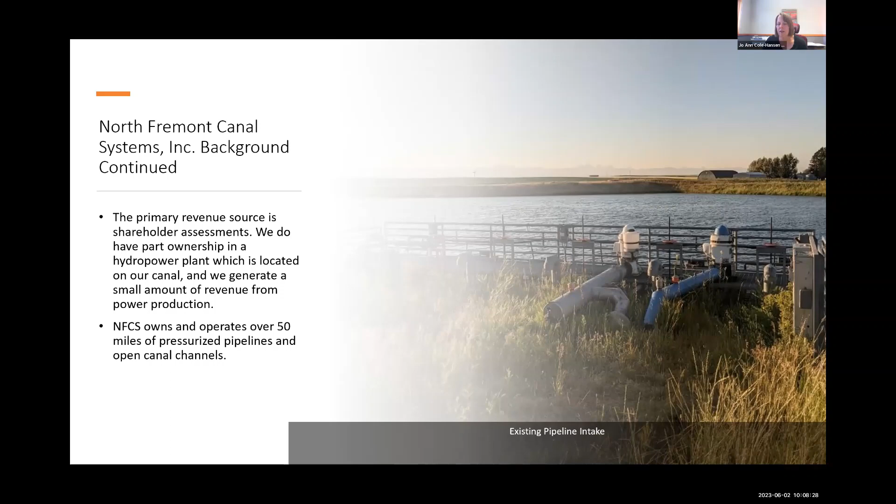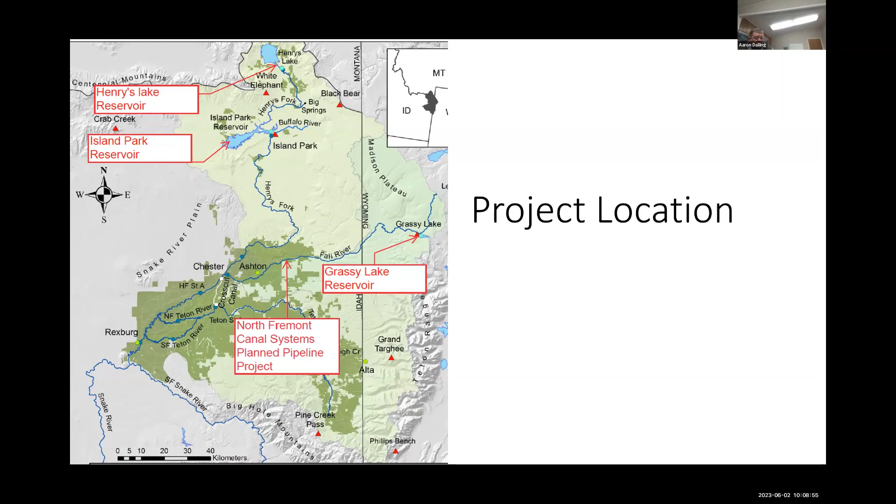Got some more project background. We started with phase 1 in 2004. Like we mentioned earlier, we're 4 out of 5 phases complete and in use. We are a pressurized system. We have 377 feet of elevation fall from the head gate to the end, so the entire project was pressurized via gravity. Phase 5 is essentially shovel ready. We've got over 90% of the engineering done.

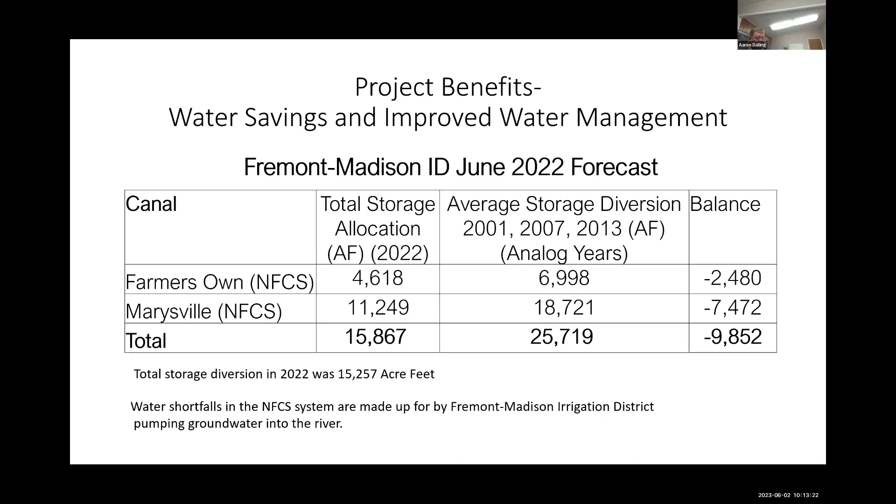2018 was the completion of our last phase, phase 4. And from 2018 to 2022, our average diversion was 28,564 acre feet. Annual savings of 6,289 acre feet. Percentage-wise, that's 18% in water savings. Now, there's some things too that we'll talk about in a moment as well, but this is water that's staying in the system. So this is water that is staying in the aquifer.

Some of our first diversions on our canal system are pasture ground that's on the very western edge of our service area. And in the open canal system, a lot of times when they would call for water, we would have to put 2 or 3 times the amount of water in the head gate to get that water to them on the end of the system. Since we are a sealed system, after the system is filled, essentially you can put in just what the people need at the tail end.

So that is water that is staying in the river at a critical time, like right now, to fill the downstream reservoirs, to make sure that we have 100% allocation, or as close to it as we can get. So something to keep in mind there.

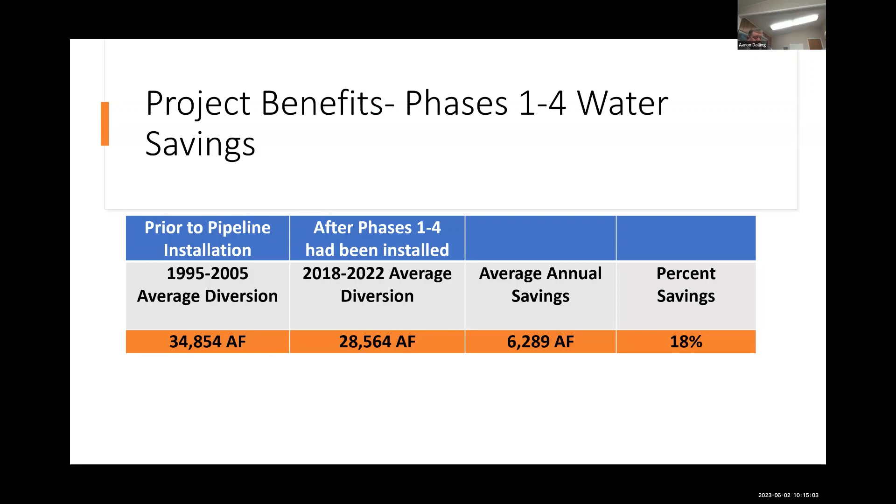Something we've done above the ESPA in our areas, we do have some planned recharge sites. We're going to look at that. We'll discuss that more in a minute. Obviously, if you put things in that pipe, you will lose your incidental recharge. But now we can do managed recharge.

And we've also done some things with the school district. We've been able to hook the high school and the elementary school up to this system, which has greatly taken the pressure off the city system, and since the city also has to run that through a nitrate treating plant, that has helped with that as well. And we hope to work with the city in the future off of this phase to be able to hook in things such as the city parks and possibly the Ashton Living Center nursing home. So something to keep in mind there.

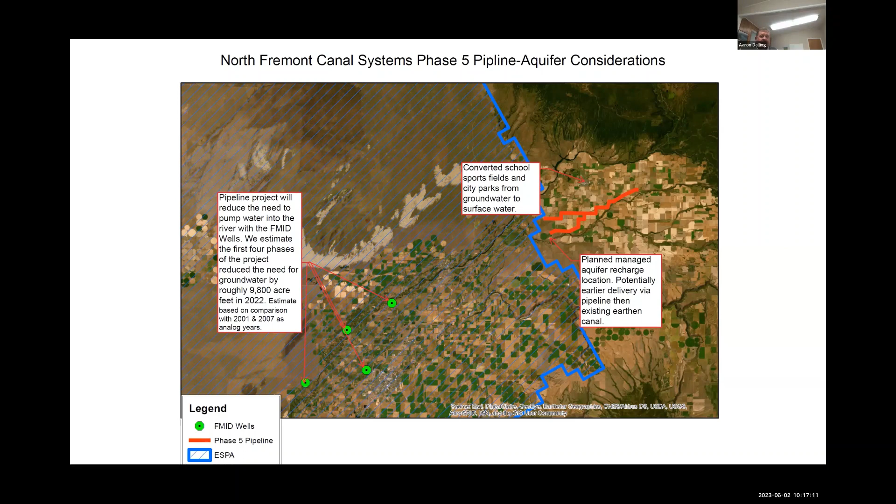So just as we mentioned earlier, we have a connection to a managed recharge site. Actually, members from the IDWR Aquifer Stabilization Committee came and looked at our recharge sites last summer, the places that we intend to do the managed recharge. We do reduce the groundwater diversions from Fremont Madison wells, which is water that stays directly in the ESPA aquifer, and our conversion from groundwater to surface water for school districts. And we're hoping to continue working with the city on that in the city parks, and like we mentioned, possibly the Ashton Nursing Home, who is one of the biggest water consumers in the city of Ashton.

The pipeline will provide gravity pressure. So all of these pumps will be fully pressurized. So there will be no pumps at all. Some of the other projects were close enough to the head of our canal that we did have to have some booster pumps, but this phase will be fully pressurized. This phase alone is estimated to reduce power annually by 1,761,300 kilowatt hours saved. And every pump on phase 5 will be removed. Once again, this will be fully pressurized.

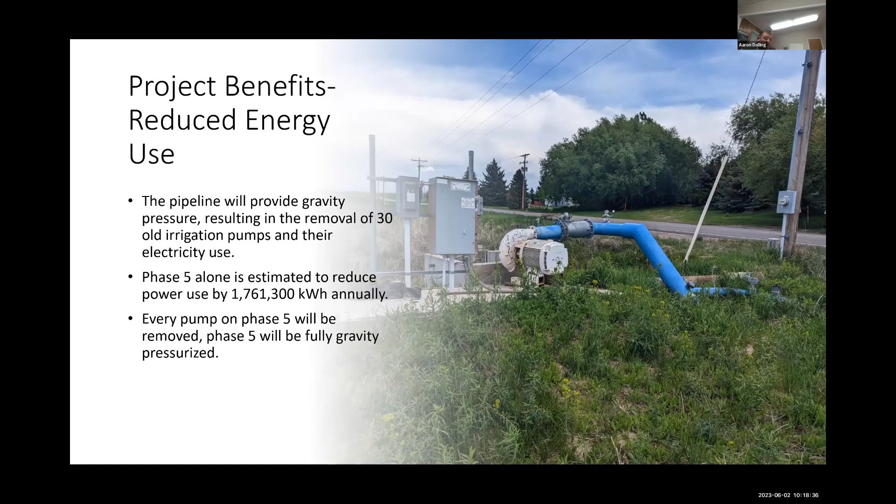As far as aging infrastructure, we plan on removing 31 old check structures, give or take. A lot of them are 30 to 40 years old. I know some of them that are older than that. Removal of dozens of old head gates, turnouts, and we all know what those are like and how much they leak, things of that nature.

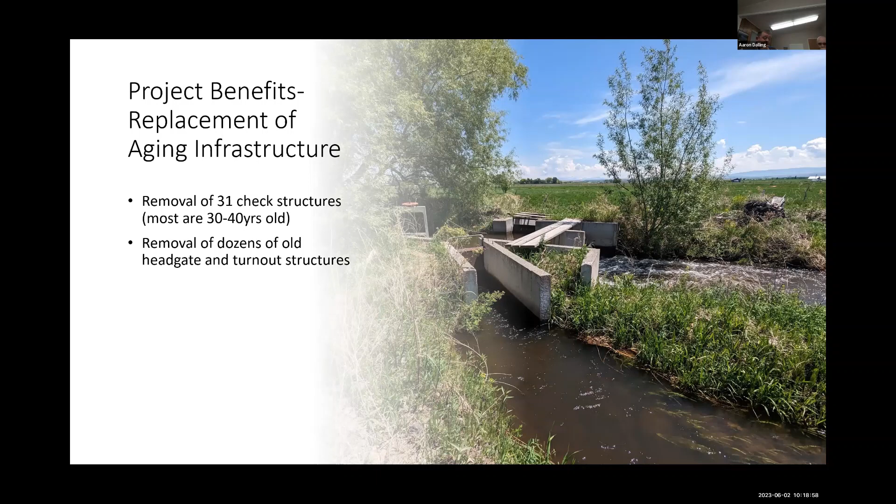We wanted just to touch briefly on some of the project benefits as far as wildlife is concerned. You know, the Henry's Fork is a world famous fly fishing destination, contributing 50 million to our local economy annually, not including the additional 14 million in property tax revenue from second home ownership in Island Park. So reduced water delivery from Island Park Reservoir during the irrigation season will increase winter flows in the Henry's Fork. These winter flows are the single most important factor for trout survival on the Henry's Fork.

We will reduce diversions from the Fall River. This increases the river flow. And we also included what was emailed yesterday. We do have a letter of support from the Henry's Fork Foundation in this. They're one of the main bodies that checks the river, kind of governs the river on water quality issues, and they are in full support of our project.

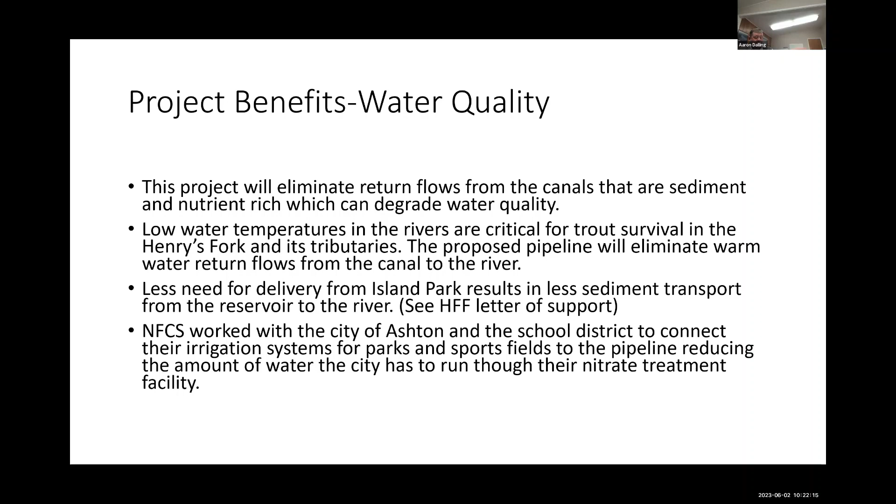Some of the regional benefits to our project: North Fremont Canal System reduced storage water diversion will increase carryover and subsequent allocations from Fremont Madison Irrigation District in years Island Park and Grassy Lake storage rights do not fill. This will benefit 44 canal companies and over 2,200 individual storage water holders. Additional carryover in the upper Snake River system may increase the likelihood of recharge water rights coming into priority earlier the following spring. And the project will reduce our required diversion during the spring when the reservoirs are filling, which is a benefit to every water user.

There are several pastures at the end of our system, like we mentioned earlier, that require water early in the year. The earthen canals require significant push water. For the pipeline, we could divert only what is needed for their irrigation system. And these pastures are a good example this year. They are currently watering, and because of some of the rains we've had the last couple of weeks, I doubt there'll be any crops that need water for probably 2 to maybe 3 weeks. So there's that period of time where that water will stay in the river and help fill the system.

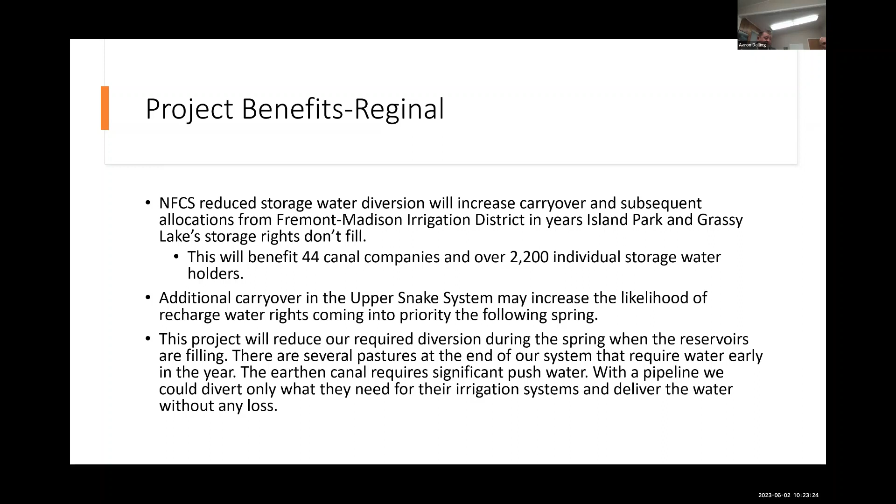Some of the local benefits of our project: something we've done in the past on the previous phases, and we plan on doing on this one, is we install hookups for the fire department. So if there is a fire in rural areas, they do not have to go all the way back to town to reload their trucks. They can hook right up to the pipeline and fill the trucks, saving a lot of time. I know there's been several fires in the past where this has been a huge benefit.

We've closed in a lot of canals, some by the school, which was always a hazard for us. We'll close some that run close to and underneath the highway, especially if you've ever been in southeastern Idaho from Memorial Day to Labor Day. There's a lot of traffic there. There's some danger hazards. We've had accidents where cars have been in the canal, things of this nature. So from a safety standpoint, this will be a good benefit.

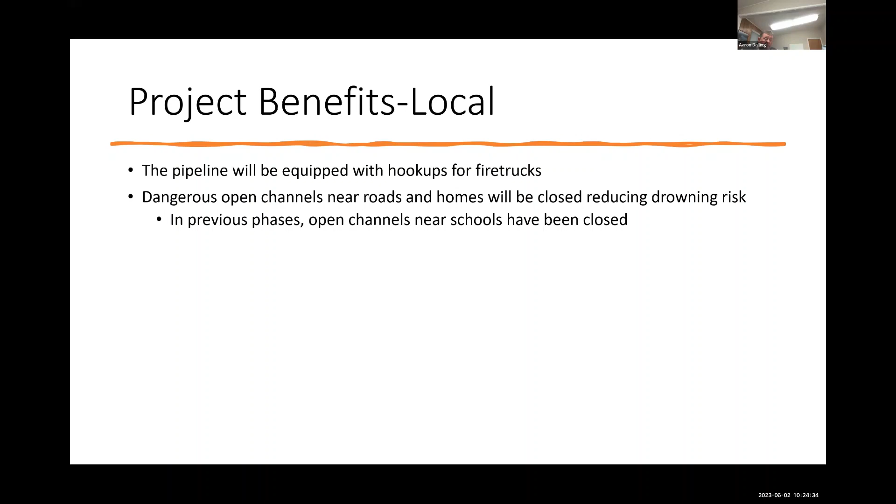We do have broad stakeholder support. So this is included as an alternative to conserve water in the Henry's Fork Drought Management Plan. Signers on the plan include the Fremont Madison Irrigation District, North Fork Reservoir Company, Henry's Fork Foundation, Trout Unlimited, the Nature Conservancy, and the Bureau of Reclamation. As mentioned earlier, we do have support from the City of Ashton, a letter of support from the Henry's Fork Foundation, and we also received verbal support from Fish and Game, but they have not been able to supply us with a letter yet.

And something to bring up as well, this project, and it has been for years, is supported by the Idaho Water Users Association by resolution. So it's resolution 2023-7. I won't take time to read the whole thing to you. I believe you have it in front of you. But I think the takeaway is that last sentence, that therefore be it resolved that the Idaho Water Users Association supports the North Fremont Canal System Incorporated in its efforts to fund, plan, and build the North Fremont Gravity Pressure Irrigation Project. So we are supported by the entire Idaho Water Users Association.

And if you have any questions on the funding here, there's one reason we asked Jake Owens to be here from the NRCS, to maybe talk just a little bit about the time constraints we do have on using the NRCS funding. So the source of our funding. So the NRCS is $7,157,988. And I'll just turn this a couple minutes over to Jake to maybe explain to you the time constraints we have there.

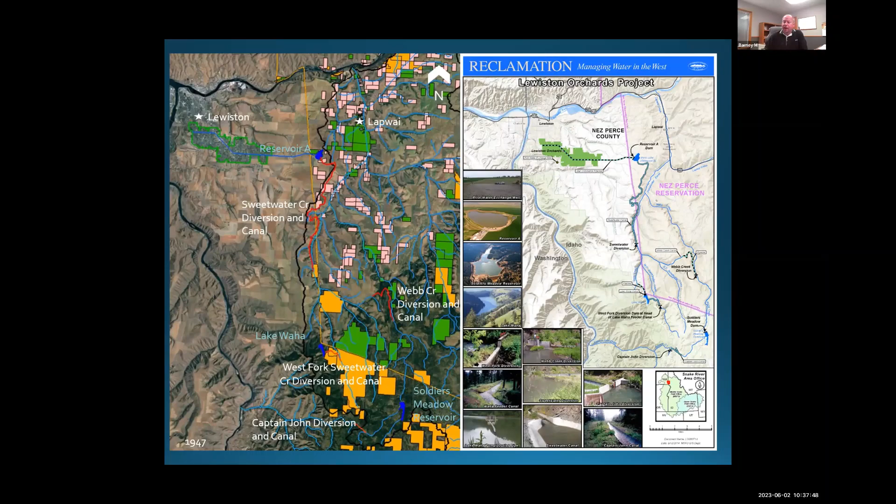And the busy map to the left of the one I was using for orientation shows you all the tribal trusts and fee title allotments within the reservation that are impacted. So again, down here, if you can follow the cursor, Soldiers Meadow Reservoir, Lake Waha, and Reservoir A, and then all of the pink, green, and yellow lots are specific allotments that are being affected through this project. So there are some complications with waters that were intended for tribal use that have been impacted by the effects of the LOID project. So how did we get to where we're at now?

The Lewiston Orchards Irrigation District actually formed as a private interest back in 1906, which is our first water right. The system was expanded from Sweetwater Diversion and Reservoir A to include diversion into, storage of, and pumping out of Lake Waha in 1915. And then the irrigation district was formed under state law in 1922, and they built Soldiers Meadow Dam on the Webb Creek watershed, and then we release water out of there, divert it out of that watershed, place it into the Sweetwater watershed, and it brings it all into our system.

Once it leaves Reservoir A, our lowest reservoir in the system, it is fully pressurized from that point. Not only does it provide ag water, but it also does provide fire flows and fire protection and suppression within the Lewiston Orchards Irrigation District service area. So one of the issues that we've had is we have a low elevation system. Our highest point is no higher than 5,000 feet. So we tend to not have heavy snows over the course of the winter, and it can be a pretty flashy system. And so the system has never done very well in being able to deliver the amount of water that we have been promised.

And in 1947, the Bureau of Reclamation took over ownership of the system, and the LOID continues to operate it in management for them. And our contracted amount is 2.2 acre feet per acre, and that amount has never been fully delivered upon. So the patrons of the district in the 1970s tried to resolve this issue on their own by building a pumping station out of the Clearwater River. Although it had favorable support, it didn't have enough to pass the bond threshold in the state of Idaho, and it failed. So the patrons of the district tried to resolve this issue on their own, and were unable to do so.

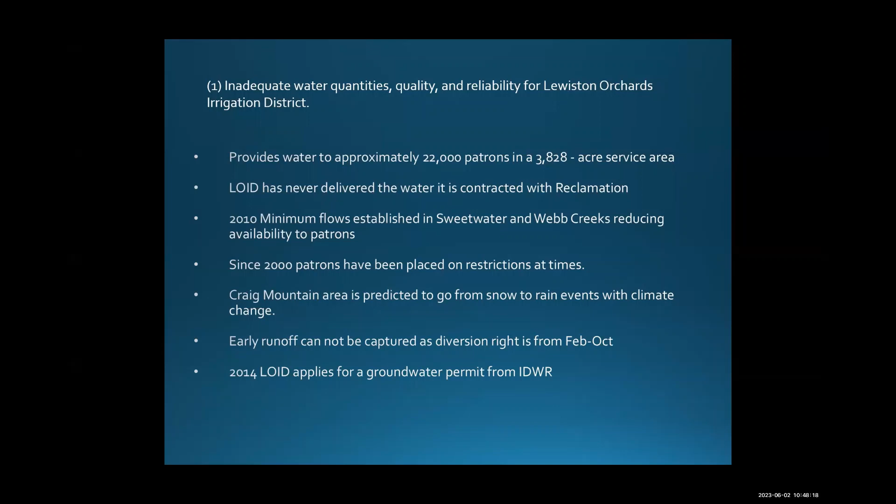And then the other difficulty is that we're already in a critical groundwater management area. Us continuing to poke big production wells into there is only going to make it, on a regional basis, more difficult for people to use the water and to manage the water that they have there. And quite frankly, the regional aquifer is divided by state line. We have Washington on the west side and Idaho on the east. At some point in time, if we continue to impact the regional aquifer the way that we have so far, and we're trying to avoid more discussions between the state of Washington and the state of Idaho, they may have to look at some form of conjunctive management as we continue to impact that system as it exists there.

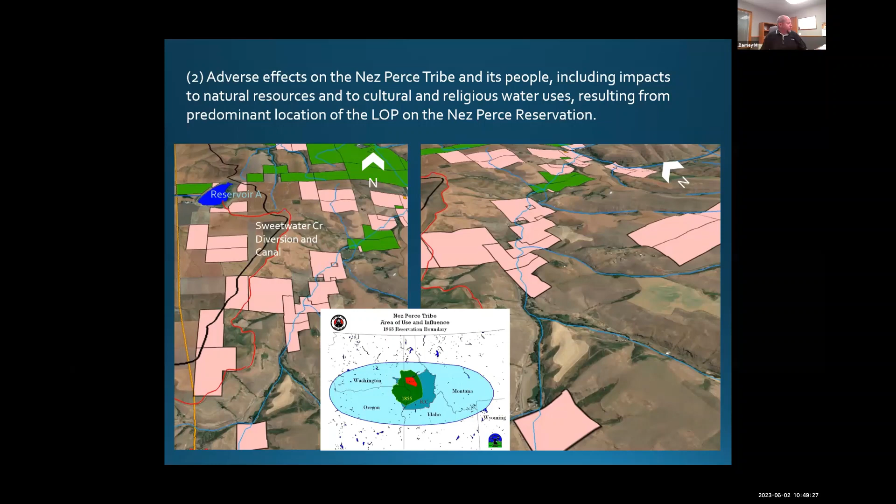This slide goes back to number 2 of our points. On the slides, the Webb Creek watershed is on the right, and the Sweetwater Creek watershed is on the left. All of the pink and green areas are tribal, tribal fee, or tribal trust lands that are being directly affected by the impacts that LOID has on water within their reservation. And then going back to the fish issue, when we diverted our full allotment out of the streams prior to being on these biological opinions, we would typically dry up streams downstream of our diversions, and it's really tough for fish to be successful if there's no water in the streams.

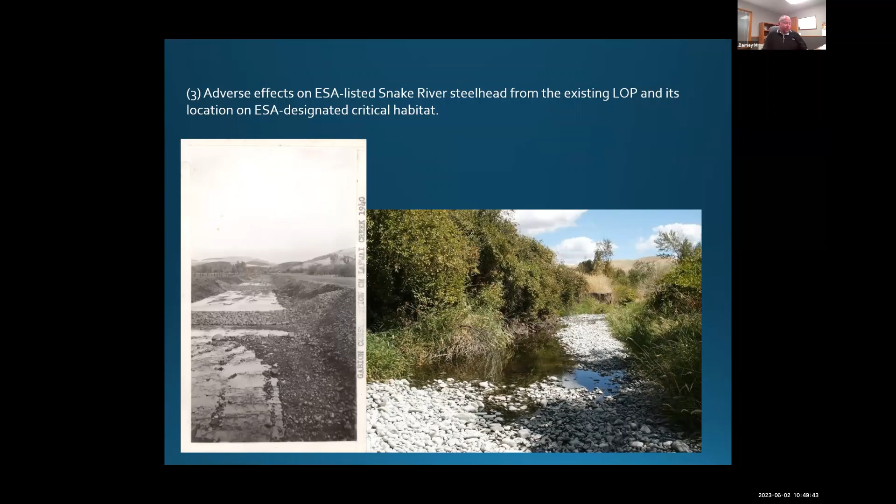So key points in moving forward: this really truly is a collaborative approach. The Bureau of Reclamation, the Bureau of Indian Affairs, the Nez Perce Tribe, LOID, the City of Lewiston, Nez Perce County, and the Chamber of Commerce continue to work together. We're looking for a solution to our issue. Although we've made it somewhat down the road of the groundwater solution, we think that there are complications and mitigations that would have to be done to continue using that as a solution. And we think that the total cost of the back end of the groundwater solution will exceed the costs of a pumping station out of the Clearwater River.

We've asked all of our partners if anybody had a big red flag with us considering the option of switching from the groundwater solution to a pumping station out of the Clearwater, and they all think that there's some viability in that. None of them had any direct heartburn to do so. And it was one of the alternatives that was considered during the NEPA process that we did back in 2011 through 2014.

Currently, we have the ability to pump 9 CFS out of the groundwater, which we are currently doing at this day. And then we're releasing those additional flows on top of our ESA flows downstream of our diversions for fish. Two other items to take into consideration are going to impact and make the groundwater solution more difficult.

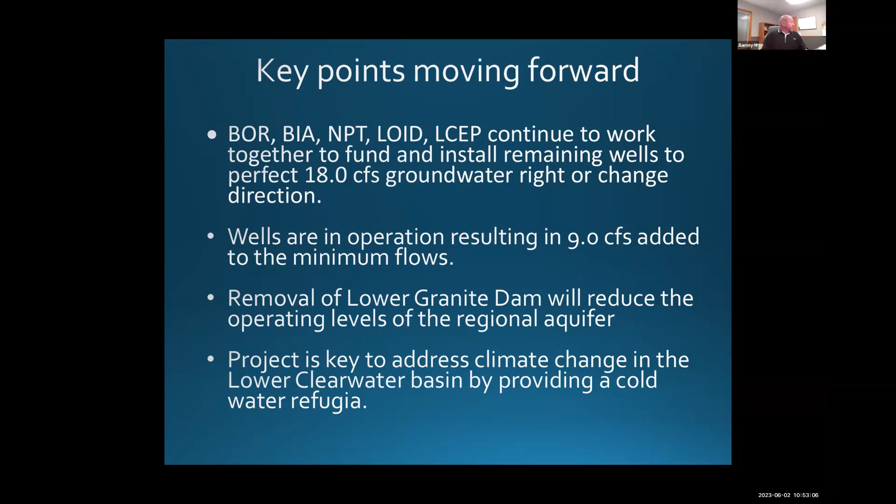So one of the things I want to come back to is the Nez Perce settlement, which is starting to see its sunset. So this issue is not going to go away. It'll probably resurface. The fact is that this exact project of a pumping station out of the Clearwater was the proposed solution back in the initial terms of this Nez Perce settlement. And once that had to be eliminated from a cost and negotiating perspective, the Nez Perce tribe ensured that it was listed specifically as a line item to be open for discussion and litigation, and the tribe has already litigated on it as soon as the agreement was signed.

We continue to await and will continue to have to operate under biological opinions from National Marine Fisheries, which impacts an already limited system. And we think that we were somewhat of a sacrifice that was necessary to the stakeholders for the state of Idaho to ensure more certainty with the negotiations and signing of the Nez Perce settlement agreement. And that is why we are asking for help today.

We think a solution from the Clearwater River will be upwards of $60 million. We paid money along with the Nez Perce tribe and along with Trout Unlimited to do a 10% engineering design on this so that we had a more firm number on how much these costs are. We have a path moving forward. We have a path that's been discussed in negotiations with the landowners for this to go. The Nez Perce tribe believes that the NEPA work has been done on this as an alternative as part of our appraisal study process that we went through.

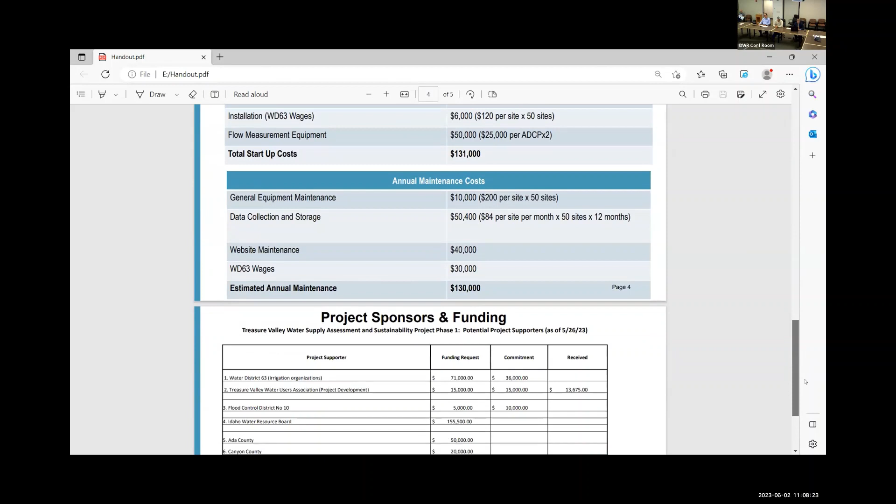Okay, this page summarizes the 3 phases of the project that we'll be talking with you about today. Provides a project cost summary in 2 pages and gives you a list of potential project supporters. We're doing with this project something similar to what Flood Control District 10 did with regard to the 2-dimensional hydraulic model that the Water Resource Board helped provide funding for a few years ago.

And that is, we're reaching out to stakeholders in the Treasure Valley who are affected by the Treasure Valley's water supply that we'll be speaking with you about today for their support. And as you'll see here, thus far, the Water District is committed to provide funding support. The Treasure Valley Water Users Association as well. Flood Control District 10 has committed funding.

We met with Ada County a week and a half or so ago, and the Board of Commissioners has encouraged us to seek up to $50,000 in funding from the county, and we'll be presenting to Canyon County and the others as we go through the course of this year.

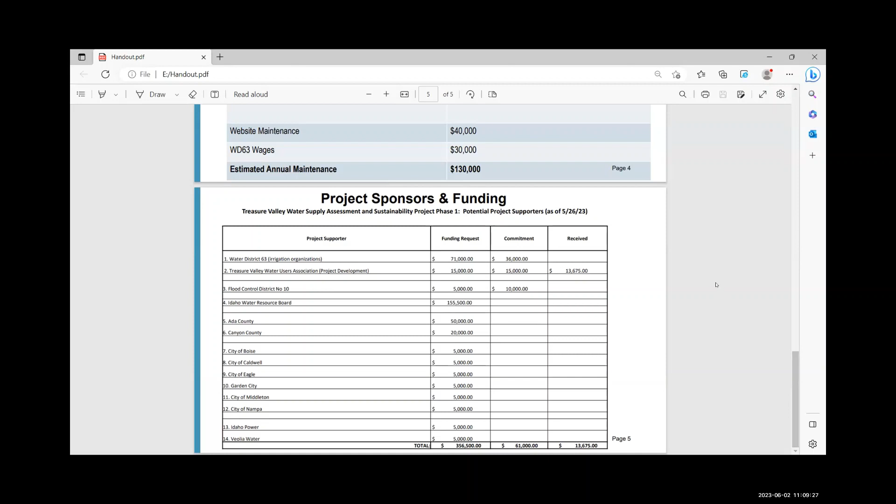Okay, now should I press stop share and bring up the presentation? Okay. Is this what you want to show? The presentation now, actually. Was that not what you just showed? No. Okay. So it's on that same disk. What do you want to see? This top file right there. Got it. Should be able to just... Right here. The back and forth. Should just advance it.

Advance it, okay. So as with the other presenters, Madam Chairman, members of the Finance Committee, we want to thank you for the opportunity to present this project to you and for your consideration to provide funding for it.

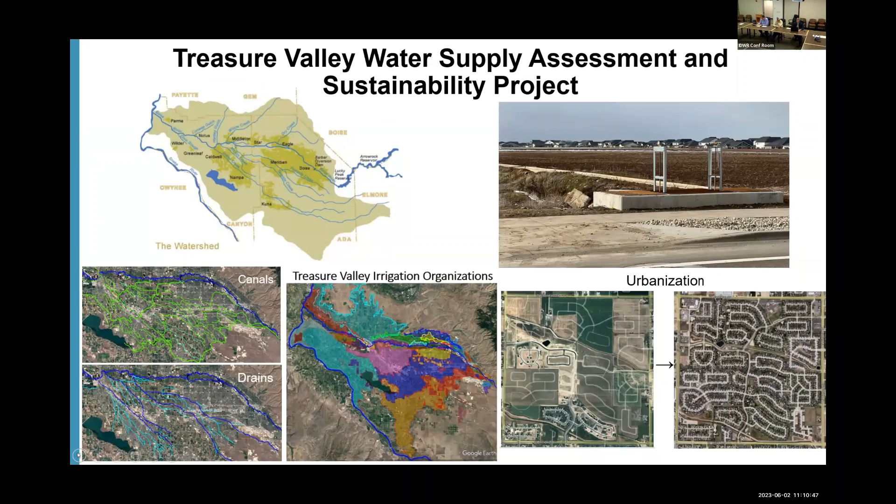Okay, the Treasure Valley watershed is shown in the slide that you can see now. You can see the Boise River beginning at the reservoirs that provide supplemental storage to the river coursing through the major cities of the Treasure Valley.

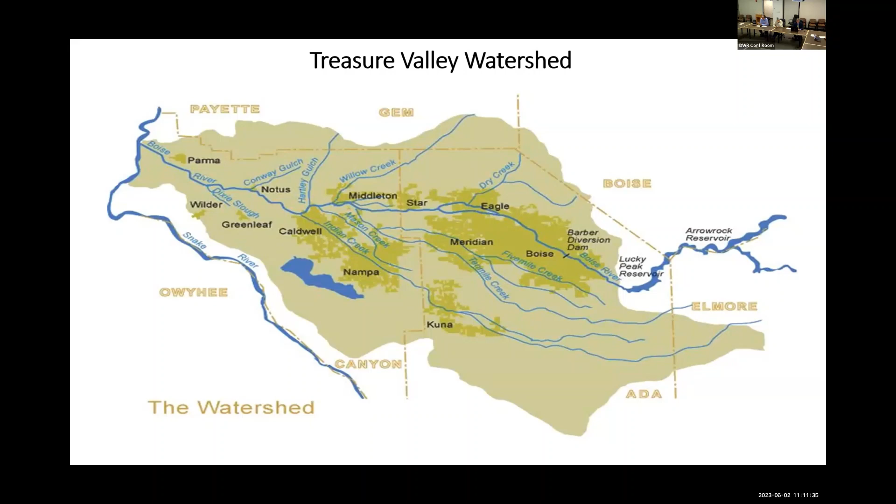And this image shows in particular a number of the major drains that I'm pointing to with the cursor now, most of which join the river below Middleton and provide the primary source of water supply to the Boise River during the irrigation season. So this project, this water supply assessment project, focuses on those drains that I just mentioned, along with many others that are of smaller scale, but yet do provide important water supply to the Boise River.

And why are we focusing on the drains? Well, as I mentioned, they are a primary source of water supply to the Boise River below Middleton. There are numerous water deliveries from the drains that are a major source of irrigation water in the Treasure Valley. And the drains are a bellwether for Treasure Valley water supplies because, as you'll see, they carry water from the shallow aquifer. So they are indicative of the condition of the shallow aquifer.

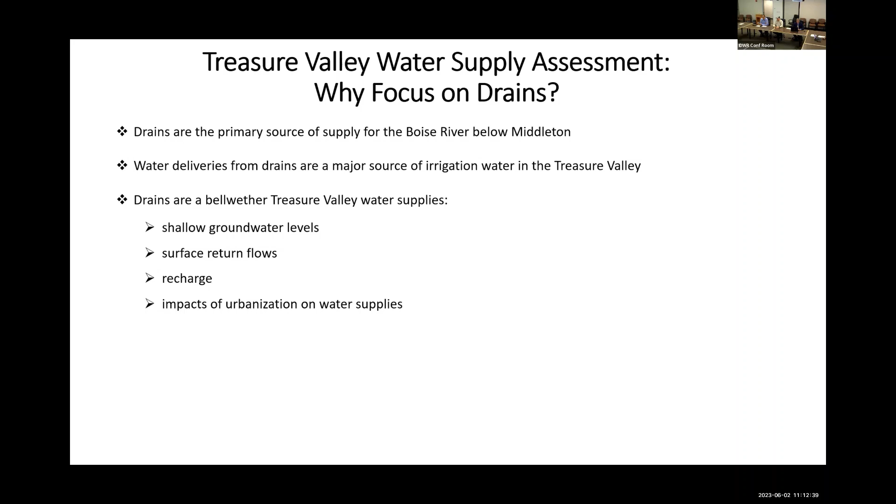They receive surface water return flows. So they are indicative of declining surface water return flows as lands urbanize. The drains are indicative of the extent of recharge, both from flood irrigation and from canal seepage, and impacts to our water supply from urbanization as it continues at its rampant pace over the last few decades.

And so historically, the Treasure Valley outside the Boise River floodplain was a desert. There were no continuously flowing, year-round flowing streams, tributaries that carried water to the Boise River. The major drains were ephemeral at best, and many of the drains that we're aware of today didn't exist at all.

So it was through the period of settlement and irrigation development of the Treasure Valley that the hydrology that we're familiar with today came to exist. And what you're seeing in this image is an outline of all the various places of use of the irrigation districts and canal companies that deliver water to the Treasure Valley. Overlaid on that image now, you can see the intricate water delivery and drainage systems that have evolved over time to deliver water to these lands.

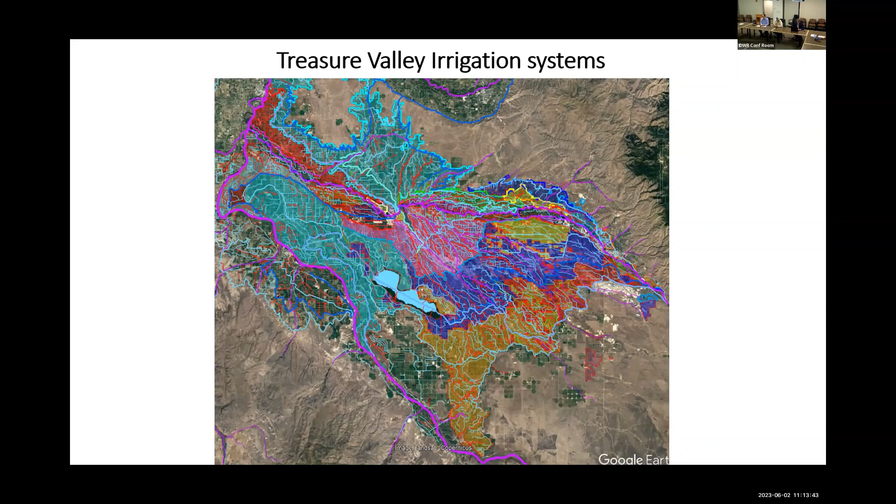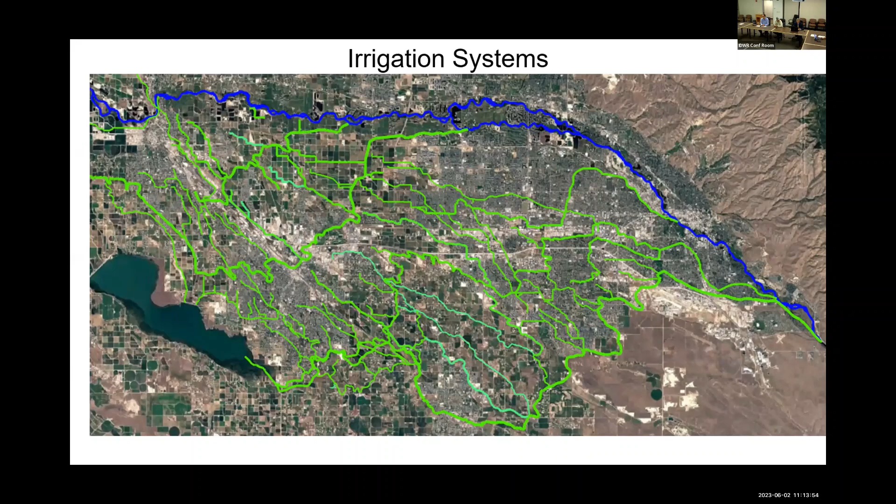This image is indicative of major canal systems diverting water from the Boise River and lateral canal systems that deliver water therefrom. So what transpired over the late 19th century and early 20th century was that seepage from the canal systems you saw and seepage from flood irrigation of the irrigated areas that you saw created the shallow aquifer in the Boise Valley.

And as I indicated before, it really created the flows that we have seen in the drains over years, so much so that by the period 1904 to 1910, areas of the Treasure Valley were waterlogged and unusable, so that local irrigators worked with the Bureau of Reclamation to develop drainage systems to deepen existing drains or to create new drains to drain the lands that had become waterlogged and make them usable again.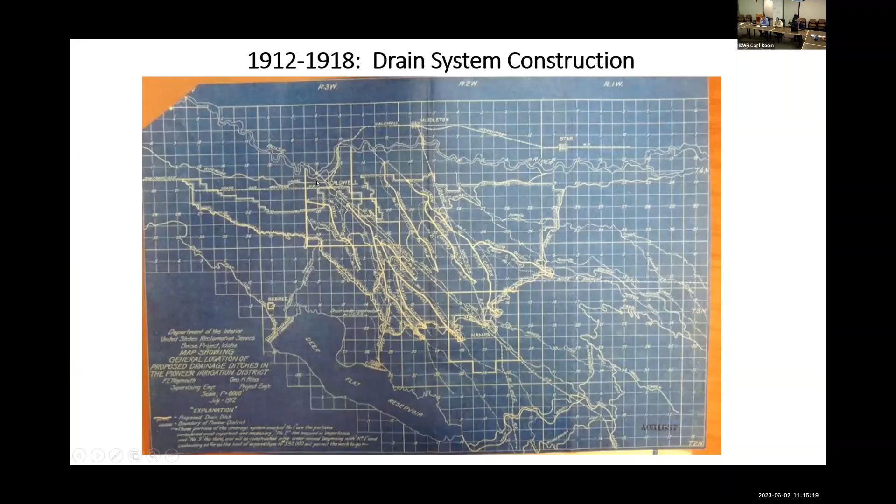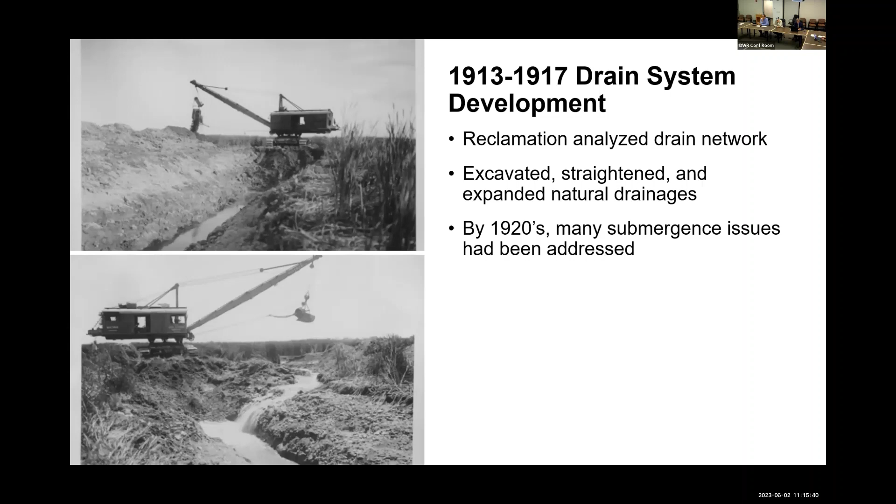Here you can see in blue and red drains that were constructed in 1916 and 1917. These drains were dug, many of them to a depth of 10 to 12 or more feet to intercept the shallow aquifer that had been created by the successful irrigation of the valley in the late 19th and early 20th century. And as you saw from an image previously, these drains crisscross much of the Boise Valley.

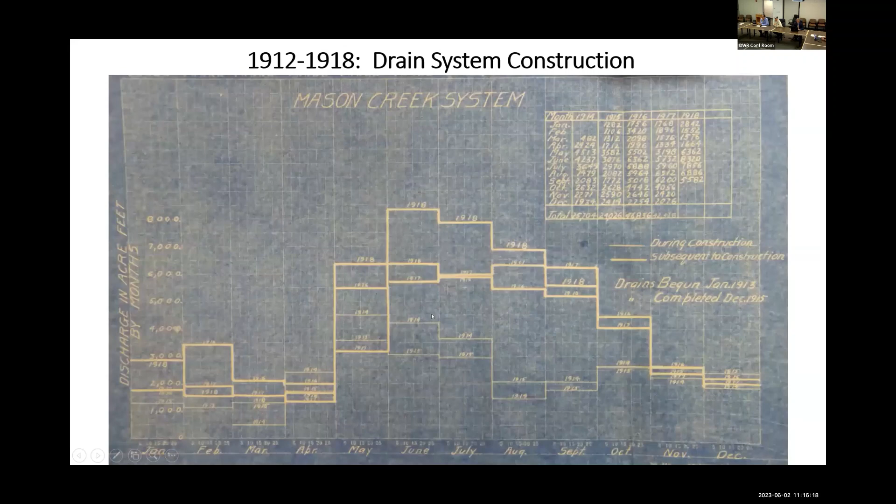And the construction of these drains was so successful, the deepening and widening of them, that flows to the Boise River increased from levels that are indicated in this hydrograph in the area where I'm pointing now, pre-construction, to the flows that you can see in the bolder lines higher up in the figure that I'm pointing to now. 5 Mile Creek is one of those major drains. Similar effect from drainage construction in Mason Creek drain, similar in Indian Creek.

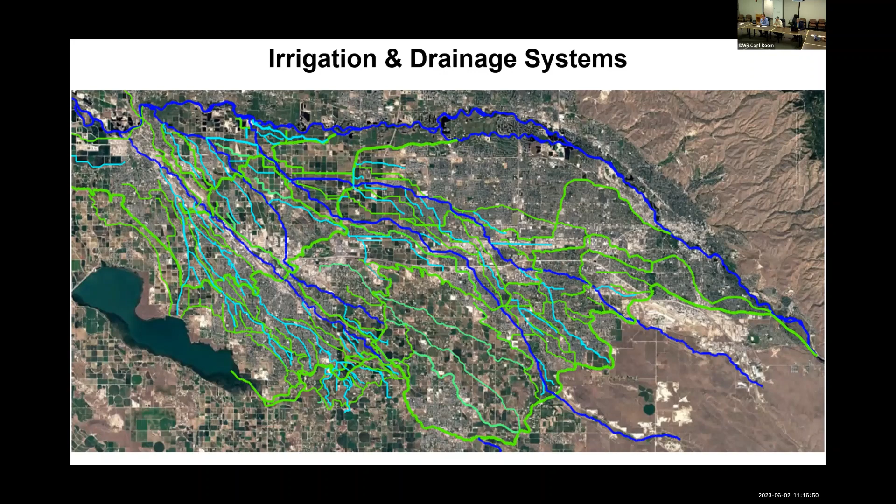And here again is an image showing Indian Creek, Mason Creek, and the 15 Mile drainage system in blue, and sub drains connecting with those drains in lighter blue. And overlaid there in this area south of the river are many of the canals and laterals that deliver water to those areas.

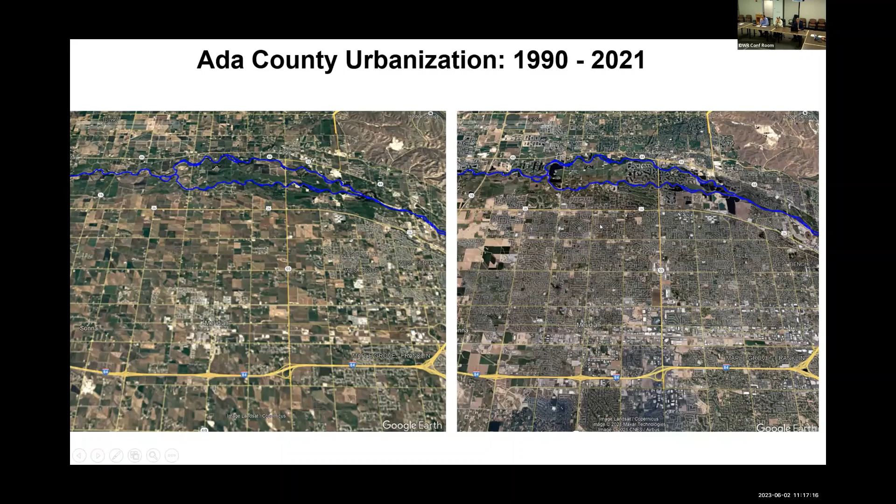So the major factor in our hydrology since certainly the early 90s has been urbanization. And you can see in these images showing the Treasure Valley in 1990 on the left, in Ada County, and Ada County in 2021 on the right, the extent of urban development in the area. Similarly, in Canyon County in the Nampa area, dramatic urbanization over the same period of time. So what are the impacts of urbanization on the hydrology of the valley?

Urbanization converts flood irrigated fields to pressure irrigated urban areas in subdivisions and homes, and much of the previously irrigated area would be covered by roads and houses and so forth, unirrigated in other words. Conversion thus reduces field seepage, as you would see pre-development in the left image, to a post-development near elimination of recharge to the shallow aquifer and surface return flow to drains from the previously flood irrigated fields.

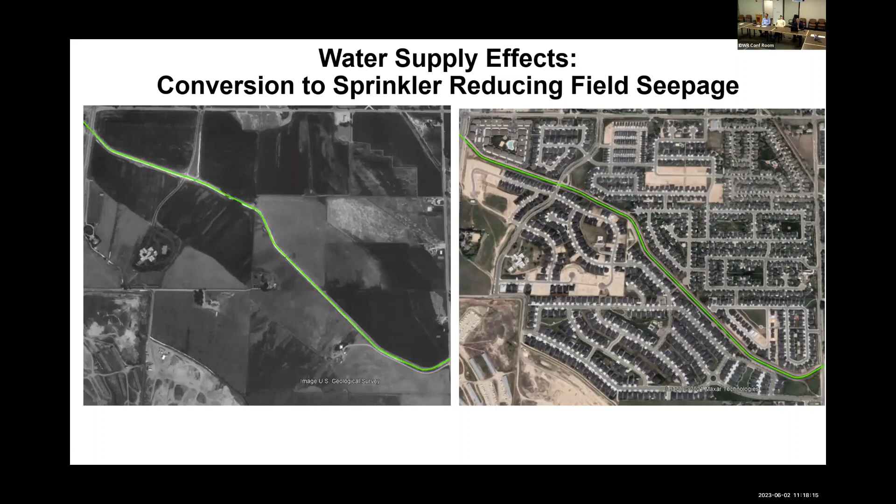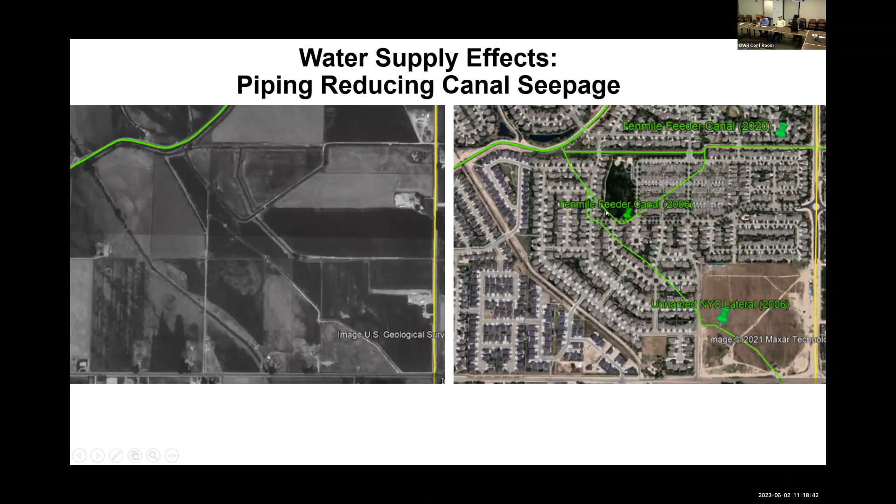Similarly, development often results in the piping of many previously open laterals and canals. Here you can see on the left some of the canals that, since their construction and until development, have been open and seeping water into the shallow aquifer as water is conveyed. And you can see in the same area years later after development the piping of many of these ditches.

And over this period of urbanization, water managers that we work with have observed reduced flows in the drainage system, and they've had to supplement drain flows to provide additional water to the drains to feed pump stations and other diversions to irrigated lands in the Treasure Valley. So about 2008, the Bureau of Reclamation performed a study in which they estimated that of 1 million acre feet of recharge to the shallow aquifer in the Boise Valley, half of that recharge is from on-farm field seepage and half is from canal seepage.

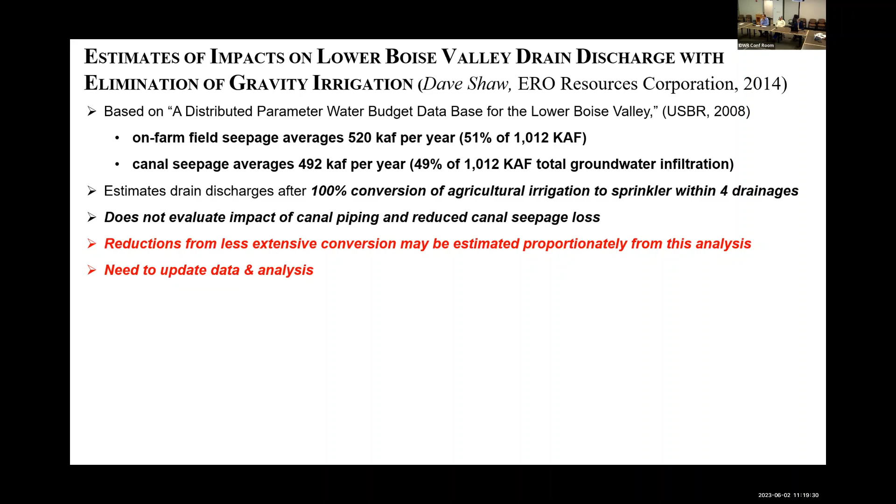So what we did a few years later was we asked Dave Shaw of ERO Resources to project what would happen in these four sub-watersheds, 15 Mile, Indian, Mason Creek, and Sand Hollow, if all of the flood irrigated fields were eliminated, if they were either paved over or converted to sprinkler irrigation. And you can see his estimation based on the Bureau's study, dramatic reductions in drain discharges.

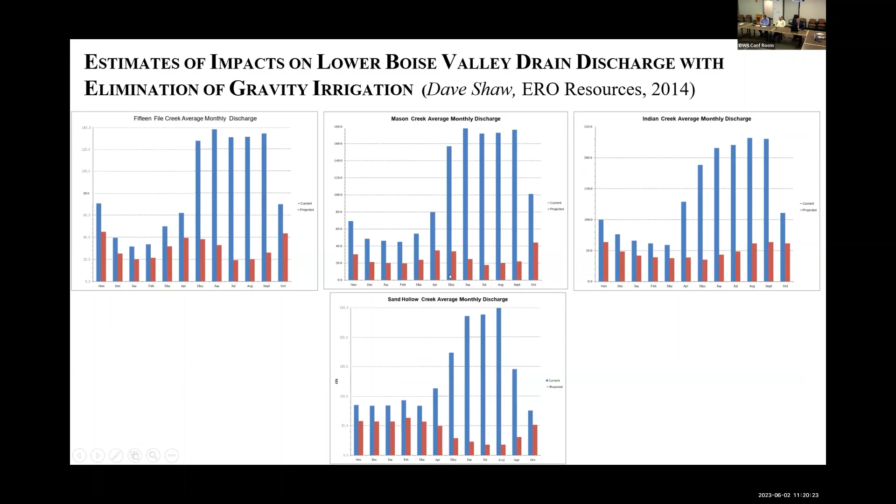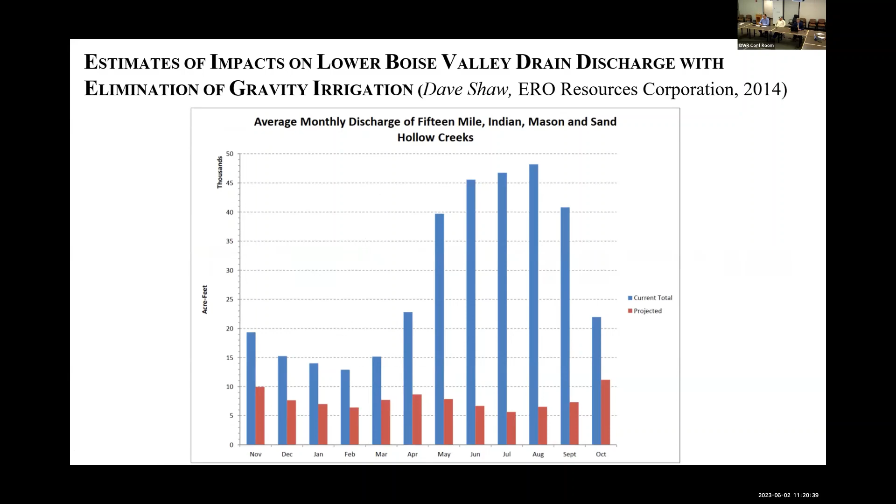And those reductions are illustrated here graphically in levels as of 2008 in blue, and, if there were complete elimination of flood irrigation in those irrigated fields, the extent of drain flows in red that you'd see in those same drains. And you can imagine the impact of this kind of reduction in water supply, one, to the diversions that take water directly from the drains, and two, to the Boise River below Middleton, which depends on these drain discharges for the flow that supplies diversions downstream of Middleton.

So what we've undertaken since then is an effort to account for the rate of change, to get a sense of at what rate are lands converting and how quickly and over what period of time is the hydrology of the valley changing as I've described.

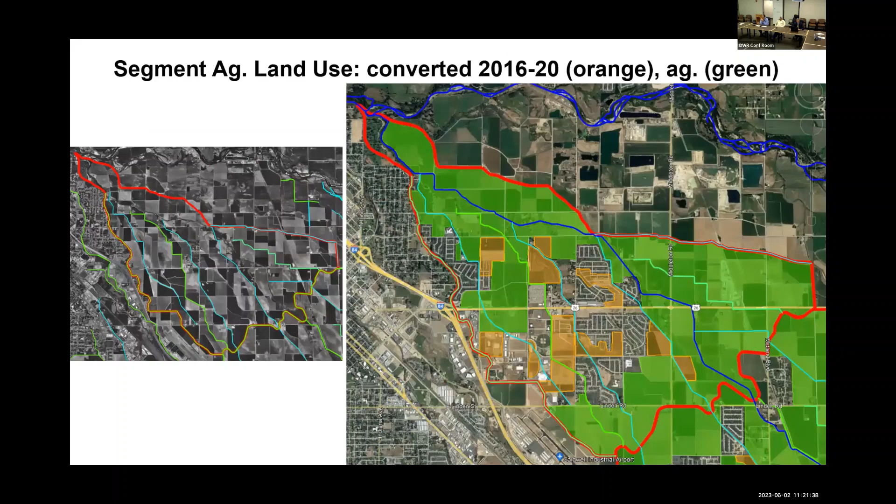So what we've done is to, in these same subwatersheds that I've described, delineate, at least most recently as of 2020, in green, the fields that remain in agriculture, flood irrigated agriculture, and delineate in orange those fields between 2016 and 2020 that converted to non-flood irrigated agriculture. Here's a closer look at how we've done that delineation.

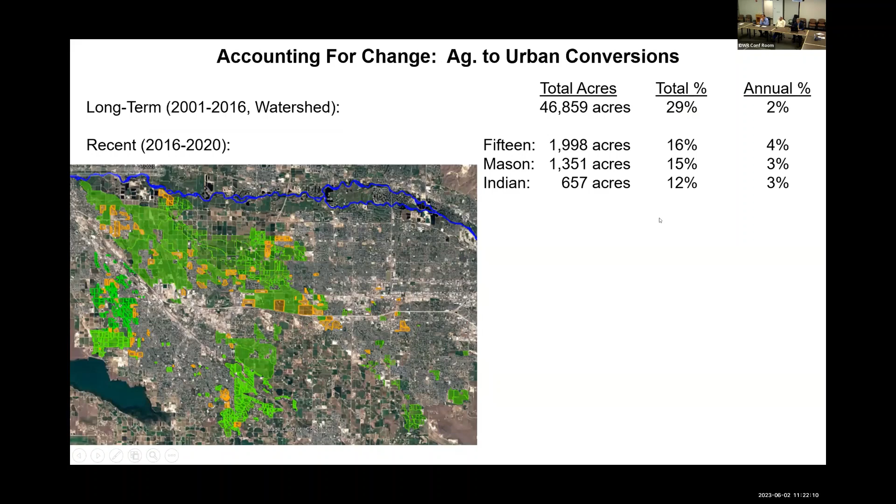So what we've determined is over the longer term between 2001 and 2016, that there was a reduction of nearly 47,000 acres of flood irrigated agricultural fields that drain to the Boise River. That's an annual rate of 2%. Over the more recent, more rapid period of urbanization between 2016 and 2020, that rate accelerated, in these same subwatersheds, to 3 and 4%.

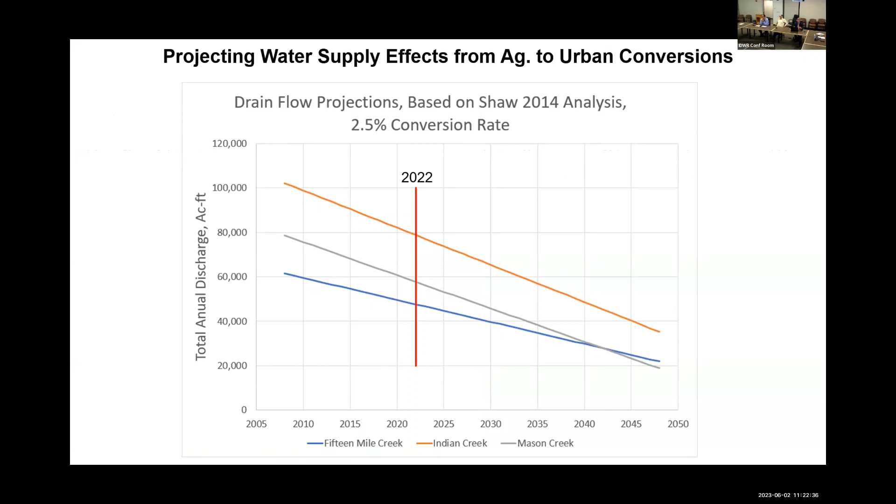Now, if you project a 2.5% rate of conversion over time of flood irrigated fields to non-flood irrigated fields in these subwatersheds, this figure shows the rate of decline you'd expect to see over the next 20 to 30 years. Like Dave Shaw's analysis, dramatic.

And so with that background, I want to turn it over to Boise River Water Master Mike Myers to talk about his perspectives on the changing hydrology of the valley and what occurred just last year. First of all, thank you for the opportunity to present our proposed project.

You gonna run it? So last year on June 30th, we had an issue on the river. Below Middleton, we have 6 diversions that require between 500 and 600 CFS at any given time to be delivered. On June 30th, we actually, after we ran accounting, only had 378 CFS of deliverable water to deliver to the 6 diversions.

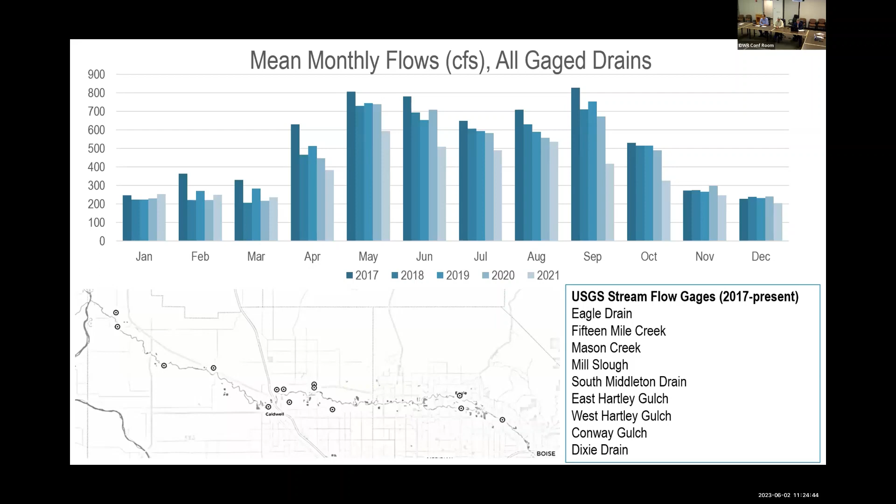So this is a graph showing the mean monthly flows of all the gauged drains that flow to the Boise River. And the reason we're pulling this up is just to show you the natural decline, or the decline in the drains that we're seeing over the last 5 years, mainly due to what we think is urbanization. So this is all the gauged USGS drains on the Boise.

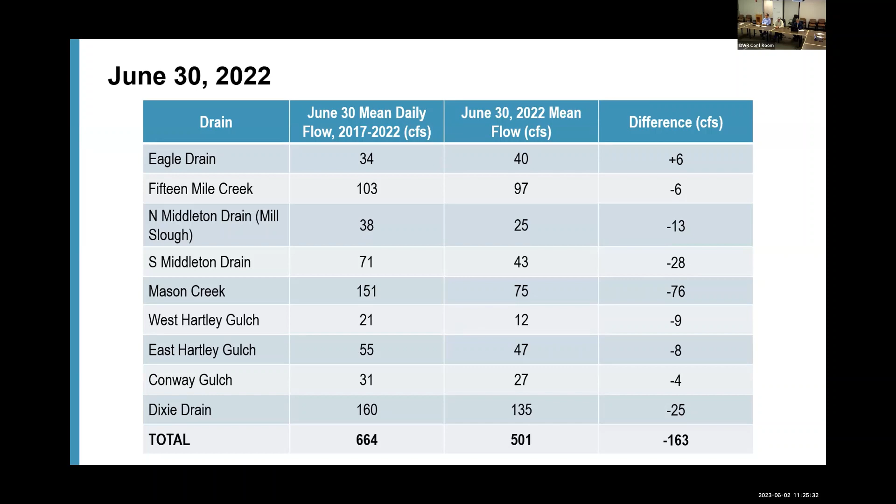June 30th, this is looking at all of them on a daily mean flow. And what I want to point out here is that we can see that 3 of the major drains, or 4 of them, had major drops on that particular day. This event lasted for about a week. You can see that Mason Creek was down 76 CFS from the 5-year average. South Middleton drain 28. And if we add all of those up, minus the Conway and the Dixie, that's what we were short of our normal deliveries to the irrigators below Middleton.

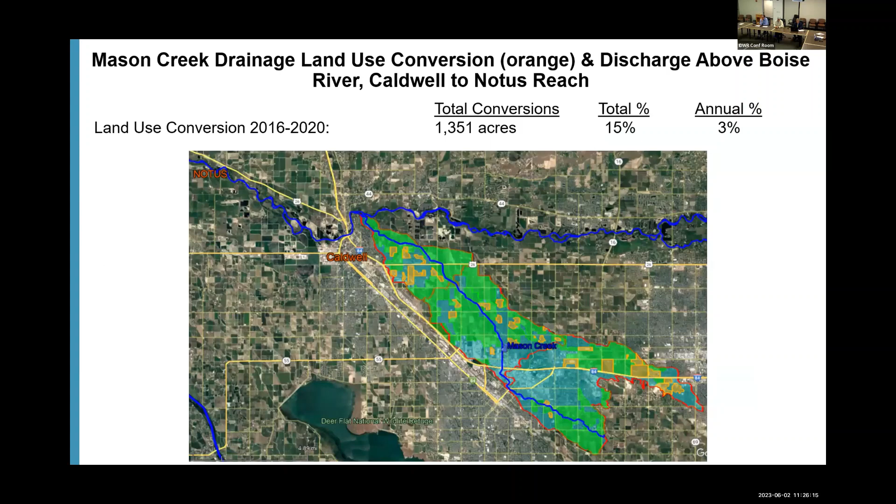So lessons from the day. Obviously, the Boise River would have approached zero flow between Caldwell and Notus if this had occurred outside of flow augmentation. And it did happen to us in 2021 for a period of about 2 or 3 days where the Boise River actually did go dry. Deliveries downstream of Caldwell rely on return flows and groundwater inflow.

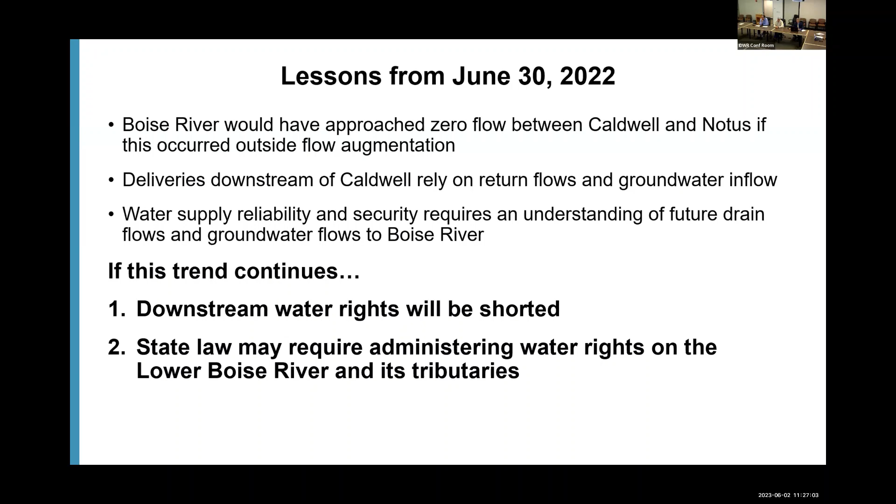Water supply reliability and security requires an understanding of future flows and groundwater flows to the Boise River. And one of the things that we're concerned about is if this trend continues, downstream water rights will be shorted, and state law may require administering water rights on the lower Boise River and its tributaries. So water supply effects.

Is this supposed to be turned over to you at this point? No, this is still me.

So piping and lining canals, laterals, and drains. These are some of the effects. Reducing seepage loss, reducing groundwater recharge, increasing water supply in canal systems.

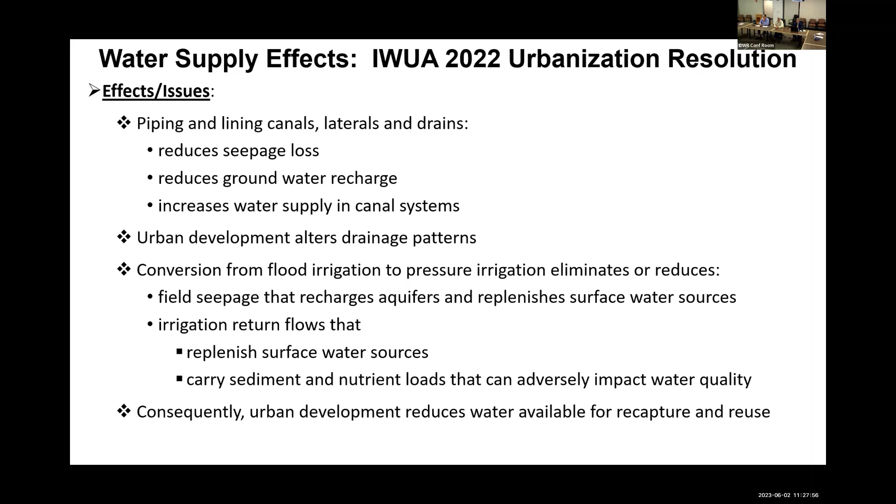Obviously, our thought here is that urban development is altering the drainage patterns and the return flows to the Boise River, and conversion from flood irrigation to pressure irrigation eliminates or definitely reduces the water going into the drain. Field seepage and other things are reducing it as well.

So the action: we want to seek funding assistance for technologies for monitoring, assessing, and modeling the drains, and to plan for and manage the hydrologic impacts of land use changes on surface drainage, return flows, water reuse, groundwater recharge and aquifer levels, along with water supply and water quality.

In January of 2023, the Idaho Water Users Association Legislative Committee voted to support the development and pursuit of funding for the Treasure Valley Water Supply Assessment and Sustainability Project.

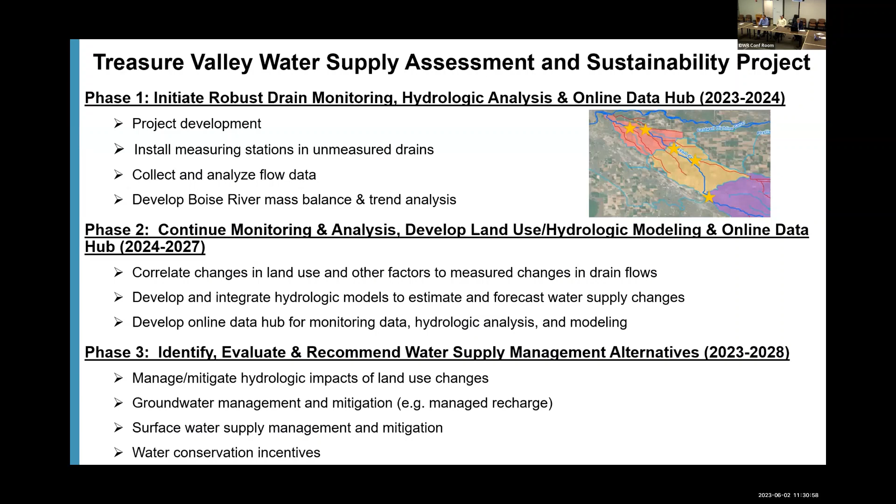Phase 1, as I said, is really collecting and analyzing the flow data. Water District 63 is well underway in establishing diversion measurement and automation, and using the same telemetry and technology has the ability to monitor flows in the drains and the sub-drains. What we're envisioning is developing a more in-depth network of flow measurement, where we look at the key locations in the drains and sub-drains, and identify the locations of the largest diversions off of these drains and key canal crossings.

We would be working with the irrigation district managers and the water managers in the areas to identify locations that are mutually beneficial, with the goal of developing a long-term monitoring network on these drains.

The second part of phase 1 is to start to compile the existing flow data we have on the drains. We have about 6 years of flow data on the drains that have been collected to support the Treasure Valley groundwater model. Use the data that we have in the Boise River to update and refine our understanding of reach gains and losses and ungauged changes to flow on the Boise River.

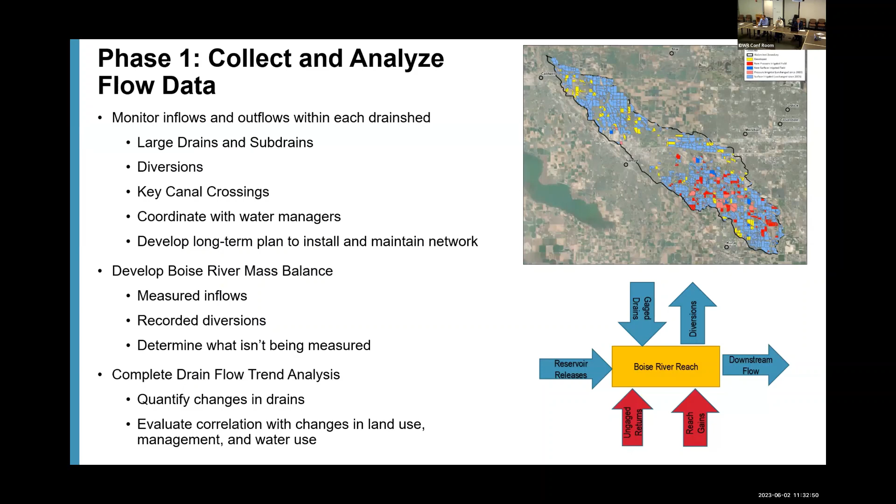And ultimately, the third step of phase 1 is to take a look at the drain flow data we have and, with some broad strokes, quantify the changes that we're seeing in the drains and how those correlate to changes in land use, changes in operations, and water management.

Phase 2 is what we're calling completing the hydrologic picture. This is building out a surface water modeling tool that allows us to predict and adapt to these changes. This builds on the Treasure Valley groundwater flow model, which models and estimates flow from groundwater to the drains. So that's an important input to the equation for drains.

If you think about drains as kind of a flow chart, that's the red arrow on the right side of this slide. That's groundwater inflow to the drains. In addition, during irrigation season, we have spills to the drains, either intentional or unintentional. We have direct runoff from flood irrigated fields, and we have diversions from those drains. All of those add up to the flow we see downstream in the drains to the Boise River.

So phase 2 is incorporating the Treasure Valley groundwater model, changes in land use that influence direct runoff, and also the irrigation system operations, so we can complete that hydrologic picture on the drains.

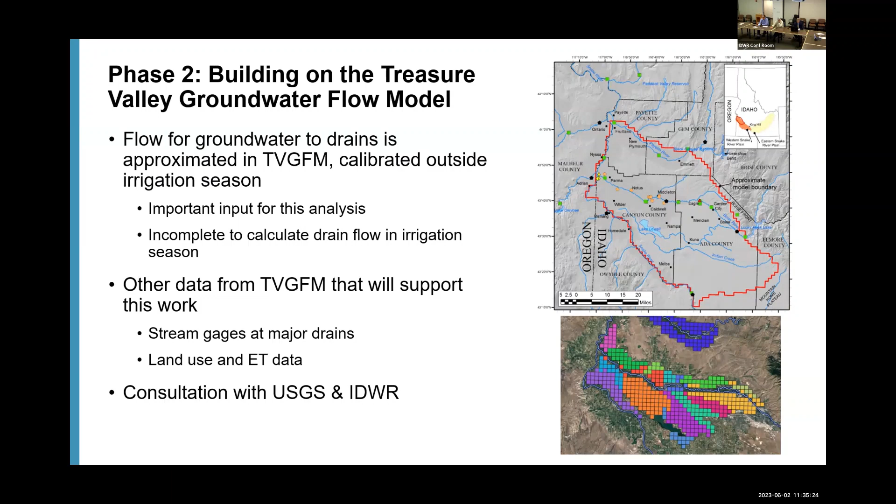I think it's important to note that the Treasure Valley groundwater model was calibrated to drain flow during non-irrigation season. That's when you wouldn't have operational spills. It's when you wouldn't have runoff directly from fields. And that's when we wouldn't have diversion. So that's an appropriate calibration of the model, and again, lends itself to taking this next step, which is understanding drain flow during irrigation season. I think the other thing that's worth mentioning is establishing a flow network in the drains could benefit the Treasure Valley groundwater model moving forward.

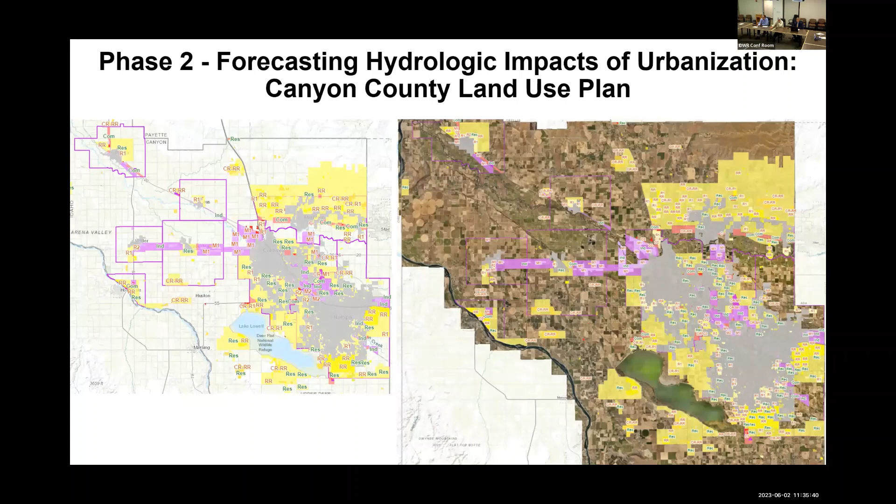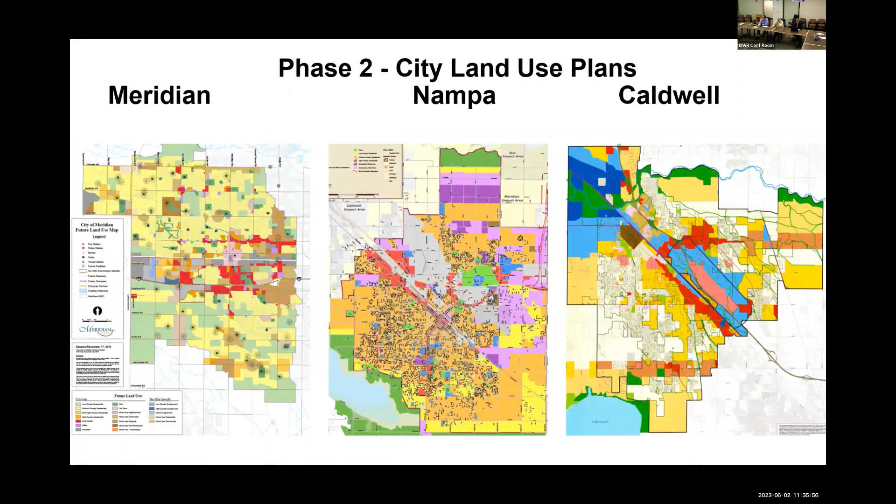These next few slides just show some of the changes of landscape that we could model the impacts of from the different comprehensive plans from the counties, Canyon County, Ada County, and the municipalities, Meridian, Nampa, Caldwell, Eagle, Star, and Middleton.

And then phase 3 is ultimately what do we do about it? We've heard a couple of presentations on projects that manage surface water and groundwater resources. So those are some of the types of projects that we could look at: groundwater management, recharge, surface water supply management, mitigation, changes to operations, water conservation incentives, and then also we've been discussing how to manage and mitigate hydrologic impacts of land use changes as they occur.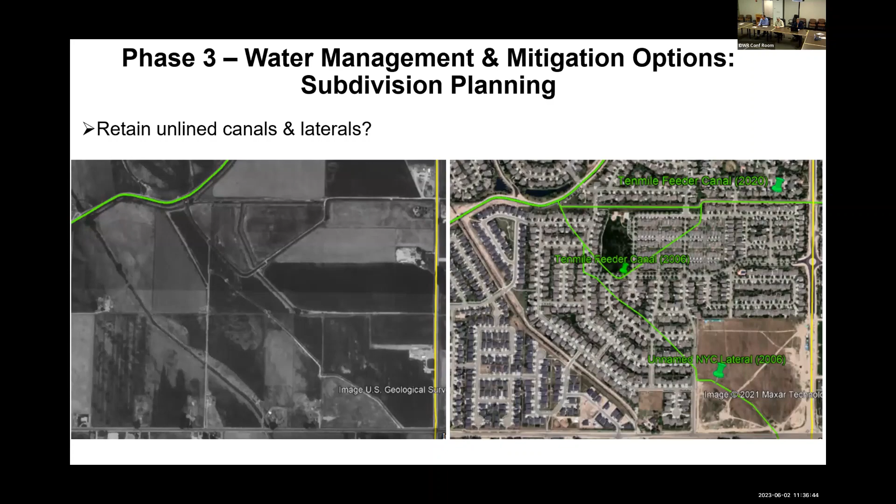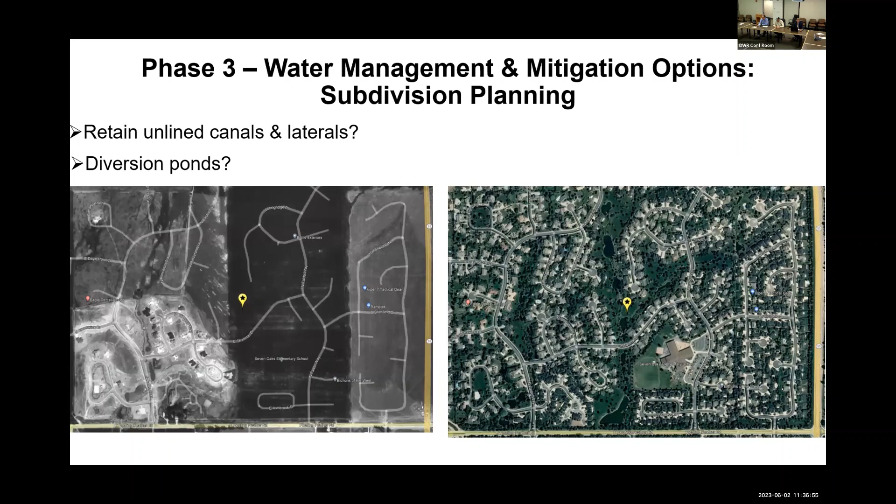So one way that we might do that is requesting that developers retain unlined canals and laterals if that makes sense, and if it's in an important area and this model would indicate that, or in the development of diversion ponds and pools that would again contribute to distributed recharge where it existed as flood irrigated lands. This is just another example of a diversion pond.

Okay, I'll turn it back over to Mike Myers to talk through the project costs. So phase 1 of the project development, 15,000. Startup cost: this is for some measuring equipment as far as a Doppler boat and the telemetry and transducers used to start measuring the drains and diversions. Annual maintenance, most of the annual maintenance is salaries for Daniel and I at Water District 63, along with some incidentals for telemetry and automation stuff. And then phase 1 analytics is set at 50,000.

Phase 2 cost, a lot of that depends on what we find in phase 1, but annual maintenance is again taking care of the equipment out on site and going out and physically measuring drains at least once a month. And then annual analytics of the model is 200,000. So each year we're looking at about 330,000 for phase 2, and then phase 3 is completely determined on what we find in phase 2. I won't go over this in great detail, but this is just a breakdown of the startup costs and the annual maintenance, and you can look over that.

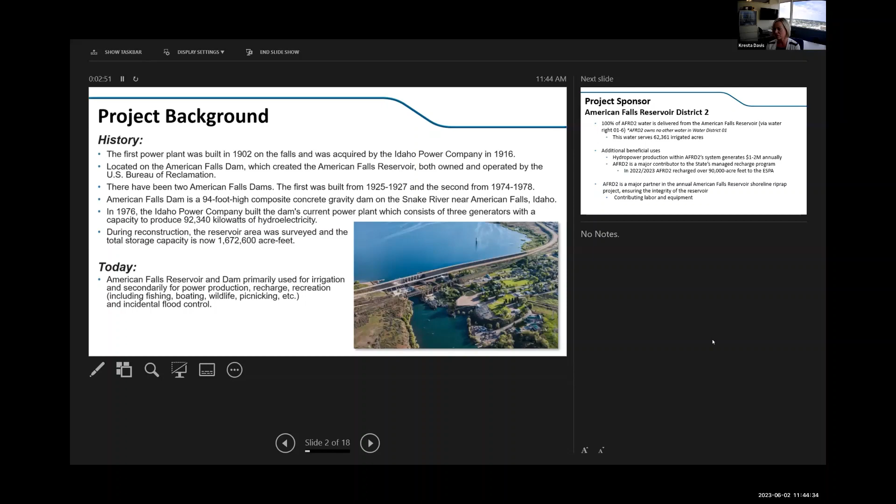years. Right now, the reservoir sits at a storage volume of almost 1.7 million acre feet, so a substantial amount of storage within the project. And because of that, there is a lot of beneficial use associated with that, primarily starting with irrigation, and then secondarily power production, recharge, recreation. And when we start talking about recreation, of course, that gets into fishing, boating, wildlife. And then there's also some incidental flood control associated with the project. And with that, I'll turn the time over to Kevin.

Yeah, Kevin Lakey. I want to take the opportunity to speak in front of the committee. I represent American Falls Reservoir District number 2.

Hey, Kevin, can I interrupt just for a second? Kevin, your audio is robotic. Is there anything you can do to improve your audio? I don't think so. Can you hear me now? We can hear you. It's just very broken up and has that robotic tone. Yeah, I must have a bad signal here. Yeah.

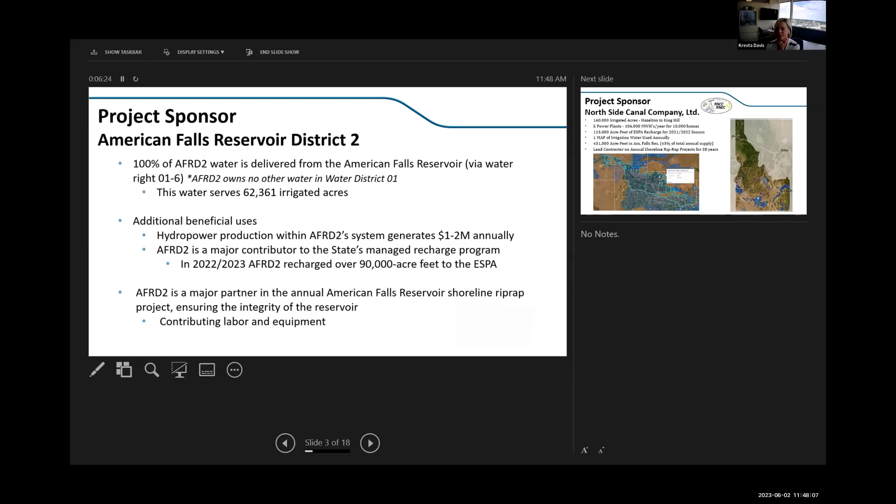AFRD2 also has generation associated with water delivery in the area of $1 to $2 million benefit annually to their constituents. They're also a major contributor to the state's managed recharge program. In the 2022 to 2023 recharge season, AFRD2 recharged over 90,000 acre feet to the ESPA. They're also a major partner in the annual American Falls Reservoir Shoreline Riprap project, which is done annually to ensure the integrity of the reservoir. They do that through contributing both labor and equipment. Okay. And with that, we'll shift over to the Northside Canal Company with Alan.

Thank you, Kresta, and thank you, Madam Chairman and members of the committee and the Water Resource Board that are in attendance today, and staff, for your consideration of our project here at American Falls Reservoir. My name is Alan Hanstein. I am the General Manager of Northside Canal Company, which holds storage space in American Falls Reservoir.

The graphic on the right side of this slide, you can see our location. We're about midway between Boise and Idaho Falls, South Idaho, on the north side of the river there. And then the graphic on the left delineates our service area. Here we run from Milner Dam in the Hazelton area down to the King Hill area, providing irrigation water to 160,000 acres of farmland. We have 5 hydroelectric power plants on our system that generate a little over 100,000 megawatt hours of electricity every year to provide energy for approximately 10,000 homes.

Every other year, in partnership with the state of Idaho, we provide 113,000 acre feet of recharge water to the Eastern Snake Plain Aquifer, and we alternate with American Falls Reservoir District Number 2 every other year. So we'll have it one recharge season, and then they'll have it the next, due to the amount of flow that we're both able to convey through our systems.

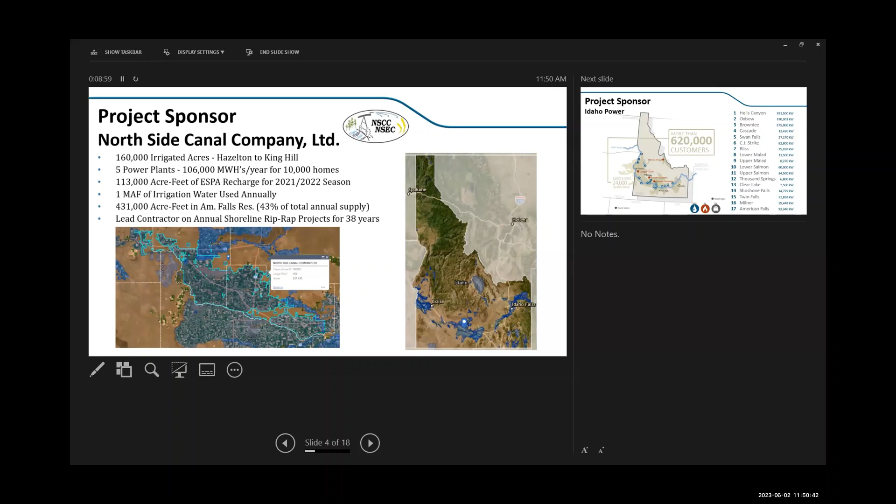And this gives you an idea of that mix. So this is our 2022 energy mix, and you can see that hydroelectric composed a little over 30% of our total generation, and that was followed by market purchases. And then we also have, again, those contracted resources such as wind, solar, and geothermal. And then over to the lower left, you'll see coal and natural gas and their contribution. So last year, this 31% equates to around 5.3 million megawatt hours generated off of hydropower. And of that, 4% of that generation came from American Falls.

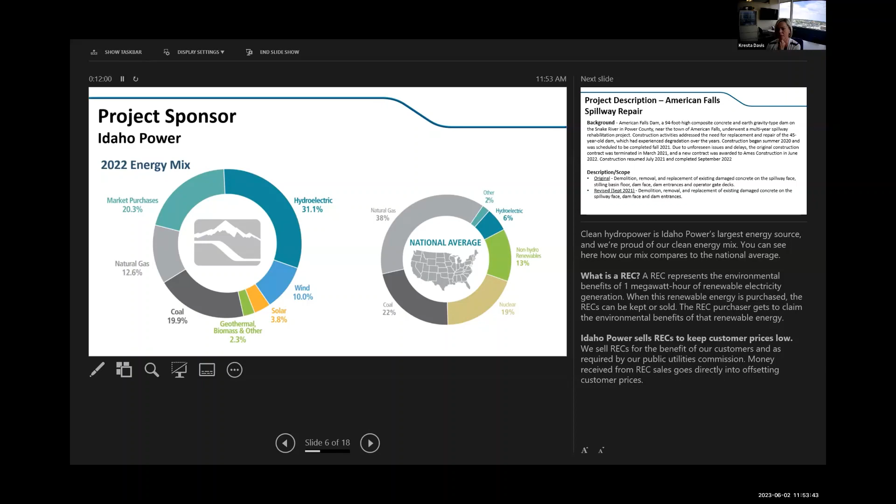So with that, I'll go ahead and turn the time over to the Bureau of Reclamation and Nicole and Ryan to walk through the project description associated with the American Falls Rehabilitation application.

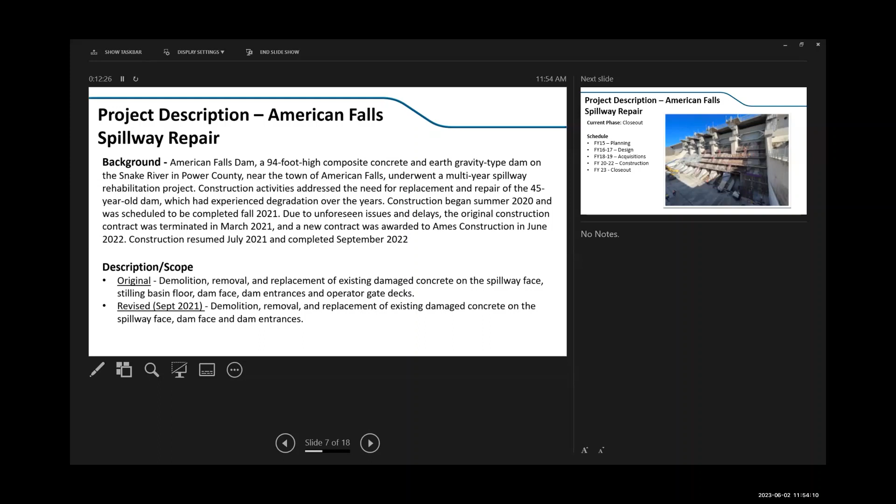So the American Falls Spillway Repair Project, that project has been underway for quite some time. We wrapped up construction last September, but the construction activities address the need for replacement of the now 45-year-old dam, which had degraded over the... focus was, the original scope was to demo, remove, and replace existing damaged concrete on the spillway face, stilling basin floor, dam face, dam entrances, and the operator gate decks, which are up above on the roadway, just off the roadway.

In September of 2021, due to some unforeseen issues and delays, which I'll speak a little more to, we revised that scope and essentially de-scoped to just include the demolition, removal, and replacement of existing concrete on the spillway face, the dam face, and then the dam entrances.

Overall construction began summer of 2020, and it was scheduled to be completed in fall of 2021. Due to unforeseen issues and delays, construction was delayed, and the original construction contract was terminated in March of 2021. A new contract was awarded to Ames Construction in June of 2021. I'm sorry, I see a typo on my slide, but that new contract was awarded in June of 2021. So very quick turnaround from the termination. And then we resumed construction July of 2021 and completed September of 2022.

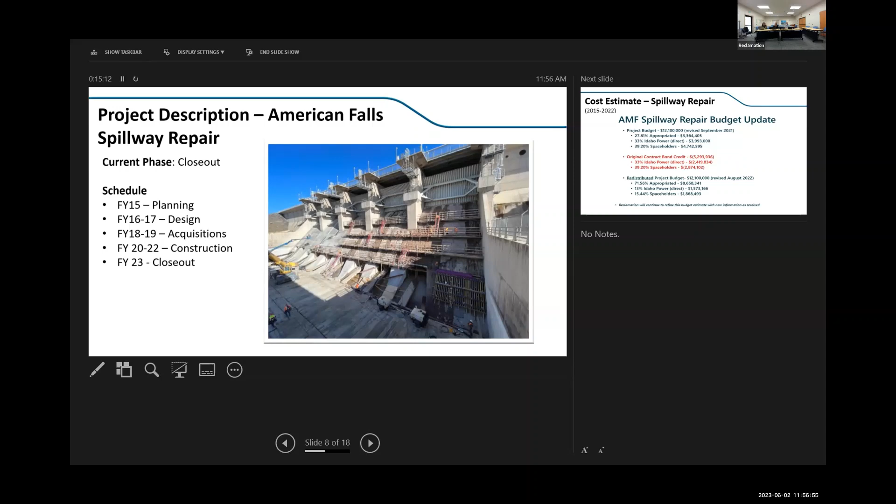The overall schedule of the project, we began in fiscal year 2015 with our planning efforts. We had our TSC, our Technical Services Center, come out and do some core sampling that informed the design that occurred in fiscal year 2016 and 17. In 18 and 19, we did our acquisitions. And then of course, construction occurred in 2020 through 2022. Next slide.

Currently, the budget is sitting at 12.1 million. Typically, any project that is done on the American Falls Dam, the allocation is 27.81% appropriated federal dollars, 33% is paid for by Idaho Power, and then 39.2% is paid for by the space holders. So you can see that breakout at the top in the blue color.

Because of the termination and some research that was done throughout Reclamation, the regional director determined that we were going to give the credit for the original contract bond to Idaho Power and the space holders. So that occurred last August, and you'll see down at the bottom the redistributed costs of that 12.1 million. That puts 71.56% to appropriations, 13% to Idaho Power, and 15.44% to our space holders. We are continuing to close this out, and final project costs will be determined in the very near future.

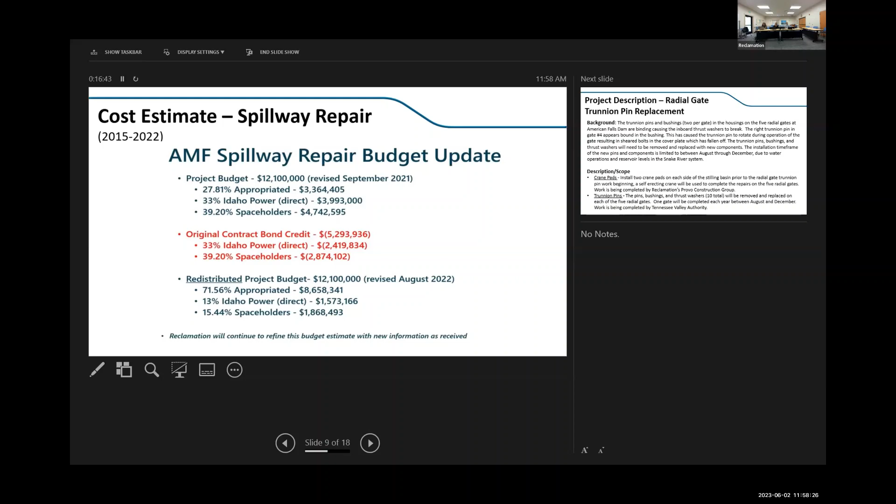Any questions on this project before I move on to the next? Okay. I'm not seeing. Yeah, go ahead.

Great. Next slide. So the next project that we have going on at American Falls is our radial gate trunnion pin replacement. At American Falls, we have 5 radial gates that sit on the top of the structure. Those are not used for operations typically, but they're there for flood control if we need them. What we found is that the trunnion pins and bushings, there's 2 per gate, are beginning to bind, causing some thrust washers to break. On gate 4 in particular, we've had issues with one of the pins. It is now seized up, and so that gate cannot be fully operated at this time. This project is going to address that.

So the overall scope of this project, I've got 2 items listed there. Let me hit the bottom one to explain the big picture of the trunnion pins. The pins, bushings, and thrust washers, 10 total, so 2 per gate, will be removed and replaced on each of those 5 gates. We are proposing to do 1 gate per year. Our construction window, of course, is when that reservoir is lower than the ogee. So that's going to be between August and December annually. And the work is going to be completed by the Tennessee Valley Authority versus a traditional construction contract. We are going to begin this year with gate 4, which has the seized pin, and get that addressed first. And then we'll come back each year and do 1 gate per year.

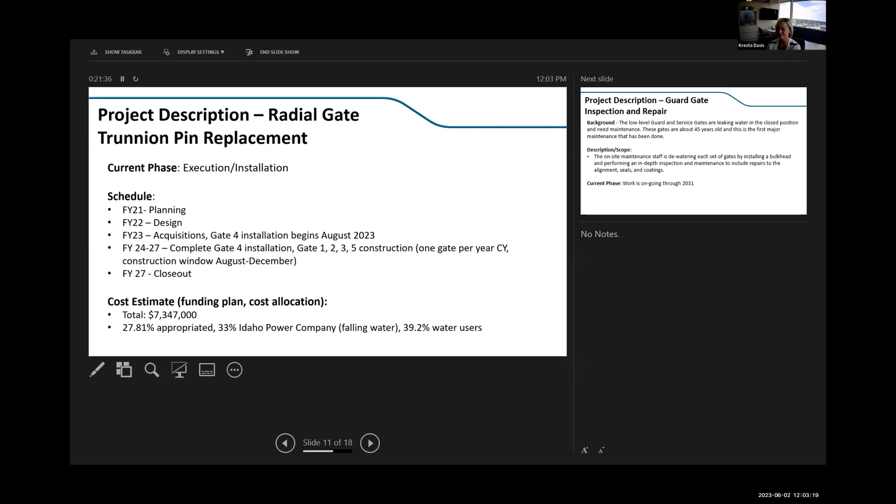Okay, we have 2 more projects. One's ongoing and one is in the planning phase. This project that's up here is the guard gate inspection repair. Nicole talked about the radial gates, and that's the trunnion pin project. Well, below that are slide gates. And that's our primary method of passing water when it's not going through Idaho Power's power plant.

We're having some leaking issues, and we have in-house staff going in and doing maintenance and repairs on them. We're adjusting alignment, as well as the coating repairs and fixing some seals at the same time. This work is being done with in-house staff, and we're trying to do 2 gates a year. We started this project last year, and we'll go through 2031. Next slide. Kresta, can you move us to the next slide? We might have a lag here.

Thank you. Another project we're doing are the power plant dam intakes. These are what stops or controls the water to Idaho Power's power plant. These are reclamation assets, original construction to the dam. They are a hydraulic cylinder that lifts gates up and down. We're having issues with our control system and our oil seals on the cylinders. We had a pump seal failure last year, and we spilled some oil, and we're having some leakage issues.

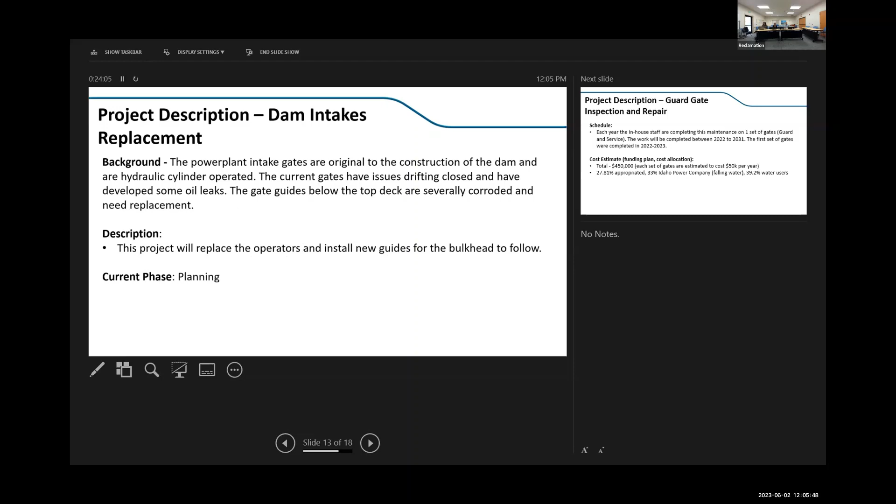We kind of got some slides out of order here. This goes back to the guard gate project, the work that's being done by in-house staff. This shows the schedule; we're doing one set of gates, a guard gate and a service gate, each year. Total estimated cost is about $450,000, and we're looking at about $50,000 per year to complete that work. The cost allocation is the same as Nicole had shared earlier. Next slide.

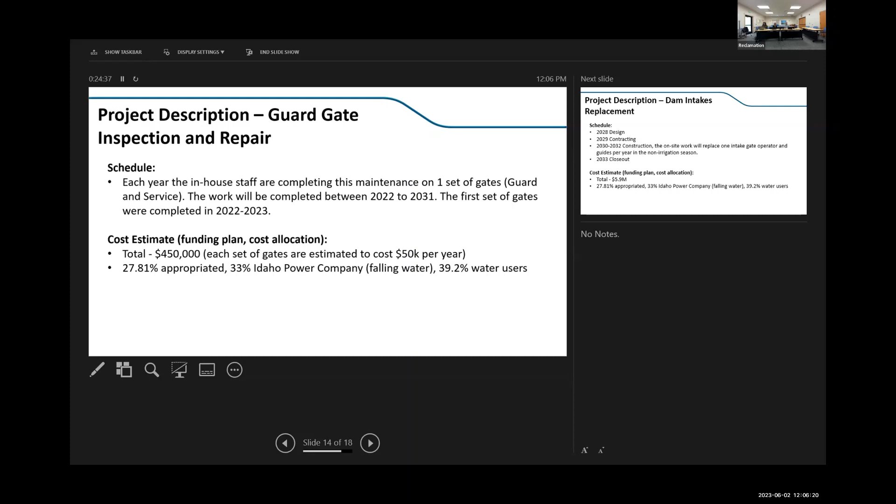And this is back on the dam intake replacement. Our current planning schedule identifies going into design in 2028, contracting in 2029, and then on-site construction between 2030 and 2032, completing one gate a year during the non-irrigation season. The estimated cost at this time is about $5.9 million, with the same allocation as the other projects we've discussed. Are there any questions? I think this wraps up the technical pieces of the specific projects we wanted to share today. Any questions so far? Board members, committee members? I'm not seeing any.

One thing that we've been doing is providing a 5-year outlook to all of our stakeholders. What Kresta has on the screen here is our snapshot that we provided to all stakeholders for American Falls for our current 5-year outlook. We just shared this in late March of this spring, identifying projects, timeframes, and estimated costs.

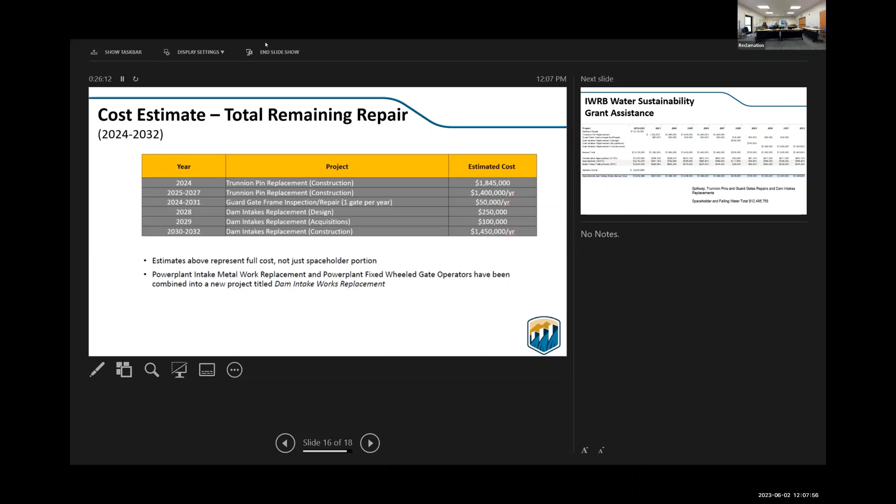Okay. All right. So the final slide here is a breakdown of that. So we've taken all of those projects and distributed them out, starting with the spillway project, and then outlined them as they fall out through time. Right here, you'll have the annual total for each of those years out into the future.

And then to your earlier question, Madam Chair, below is a breakout of the cost share as it's been described by Nicole and Ryan, with the 27.8% falling to Reclamation, the 39.2% falling to space holders, and the 33% falling to Idaho Power.

So down below, highlighted in the light blue, is the annual total cost to space holders and the falling water component. And then if we total that up over this period of time, with the new estimate delivered by the Bureau of Reclamation earlier this year, the total cost for space holders and the falling water contract is around $12.5 million.

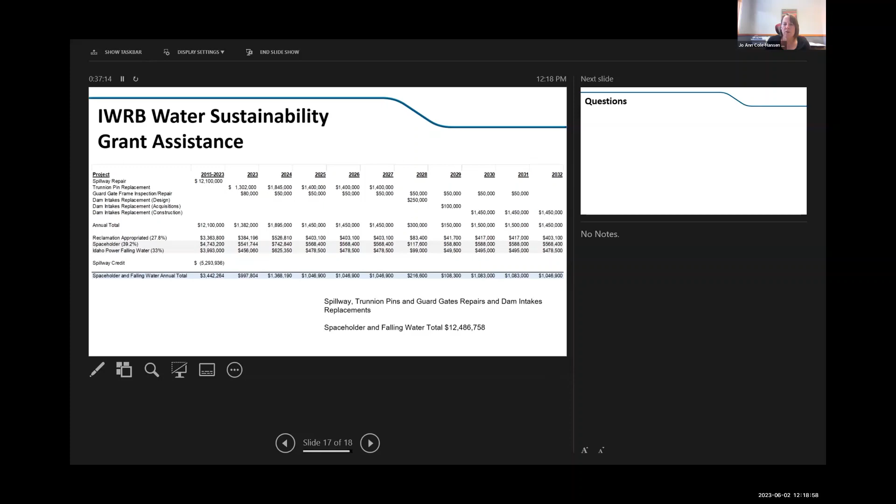Well, this has certainly been a full day of presentations, and we do appreciate everyone taking the time and the effort to bring your projects before this committee, and pretty much the whole board participated with the committee, which I think is important. I guess with that, I'll turn it back over to Brian Patton. Thanks, Madam Chair. Next item on the agenda would be other non-action items that committee members may have.

Jeff? I'm good, Madam Chairman. Okay. Board Member Stevenson, are you still with us? Yep, you're still there. Do you have anything? Okay. Board Member Van Stone, do you have anything? No, I'm good right now. Yes, thank you. Any other members have any questions or comments for the Finance Committee? Okay, I see that John Simpson has his hand up. Do you have another comment, John? No, Madam Chair, if I have my hand up, it's by mistake, so I'm sorry.